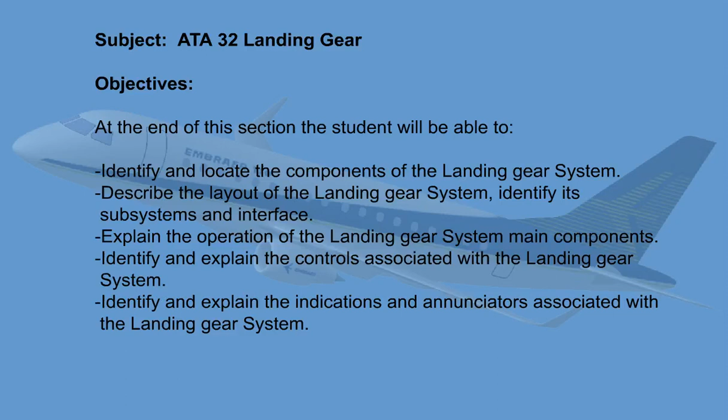The Embraer E190 has a retractable tricycle landing gear system with 2 main landing gear assemblies and 1 nose landing gear assembly. The main landing gear assemblies are telescopic and retract sideways into the wing and fuselage. Each main landing gear assembly incorporates 2 wheels with multi-disc carbon brake assemblies.

The nose landing gear assembly is telescopic and retracts forward into the fuselage. It incorporates 2 wheels with a hydraulic nose wheel steering mechanism, allowing the aircraft to turn on a taxiway as narrow as 17 meters.

During normal operation, the landing gear system is electronically controlled and hydraulically operated. Several proximity sensors are installed to provide position and status signals to different electronic modules, located in the Modular Avionics Units, or MAU, for control and monitoring purposes. The sensors also display system status to the pilots via the EICAS display in the cockpit.

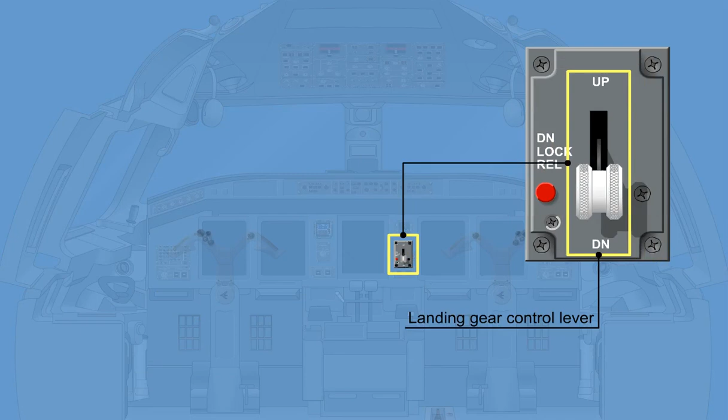The following equipment is installed in the cockpit for landing gear extension and retraction: the landing gear control lever for extension and retraction during normal operation; an extension override switch used to extend the landing gear in case of a failure in the landing gear electronics; and a manual release lever used for freefall extension in case both the electronic and electrical systems fail.

The cockpit equipment for steering the aircraft includes a steering handwheel, steering pedal sensors, and disarming switches on the control yokes.

2 brake pedals for the left and right main landing gear brakes are installed for both pilots. An emergency parking brake handle mounted on the center pedestal allows for braking even in case of a total hydraulic system loss. An optional automatic braking system can be engaged by the crew by selecting the respective auto brake switch in the cockpit.

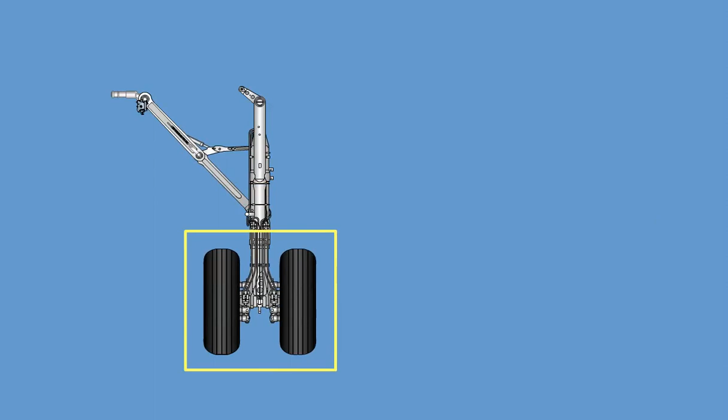The main landing gear assemblies are attached to the left and right wings. The assemblies include 2 wheels with brakes attached to a telescopic shock strut. A folding side stay holds the main landing gear in the fully extended position. A locking stay holds the side stay in the fully extended position. A pair of down lock springs hold the locking stay in the extended and locked position.

Proximity sensors transmit the following signals to the Proximity Sensor Electronic Module, PSEM: main landing gear down and locked, main landing gear up and locked, and aircraft on ground, also referred to as weight on wheels.

During retraction, a hydraulic release actuator unlocks the locking stay. A hydraulic retraction actuator retracts the main landing gear. The uplock holds the main landing gear in the retracted position. There are 2 doors attached to the outboard side of each main landing gear, and a 3rd door is attached to the wing. The doors are mechanically opened during extension and closed during retraction.

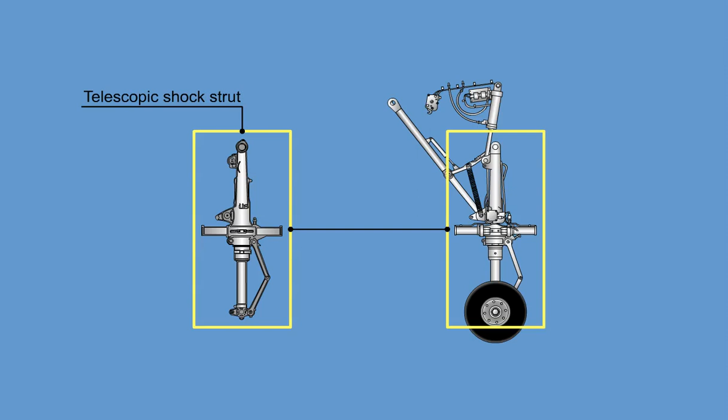The nose landing gear assembly is attached to the forward fuselage. 2 wheels and a hydraulic steering motor are attached to a telescopic shock strut. A folding drag brace holds the nose landing gear in the fully extended position. A locking stay holds the drag brace in the fully extended position. A pair of downlock springs hold the locking stay in the extended and locked position.

Proximity sensors and switches and feedback sensors transmit the following signals to the Proximity Sensor Electronic Module and the Nose Wheel Steering Control Module: nose landing gear down and locked, nose landing gear up and locked, aircraft on ground, nose landing gear steering angle and nose landing gear steering over travel.

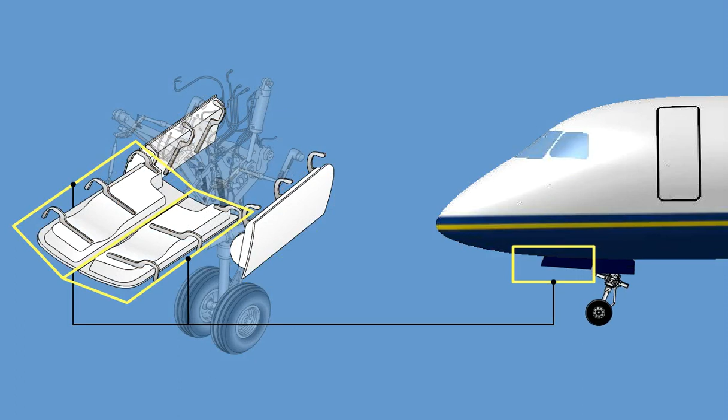During retraction, a hydraulic release actuator unlocks the locking stay. A hydraulic retraction actuator retracts the nose landing gear. The up lock holds the nose landing gear in the retracted position. Two mechanically operated doors are mounted in the fuselage on each side. The forward doors close again as the nose landing gear reaches the extended position.

There are three modes of landing gear operation available to the crew: normal extension and retraction, electrical override, and mechanical freefall. In the normal extension and retraction mode, the landing gear actuation is electronically controlled and hydraulically operated. The landing gear selector valve is controlled by the Proximity Sensor Electronic Module, PSEM, and provides hydraulic pressure to the actuation cylinders.

In the electrical override mode, the landing gear extension is electrically controlled and hydraulically operated. The extension override switch takes direct control of the selector valve, and the Proximity Sensor Electronic Module is removed from the control loop.

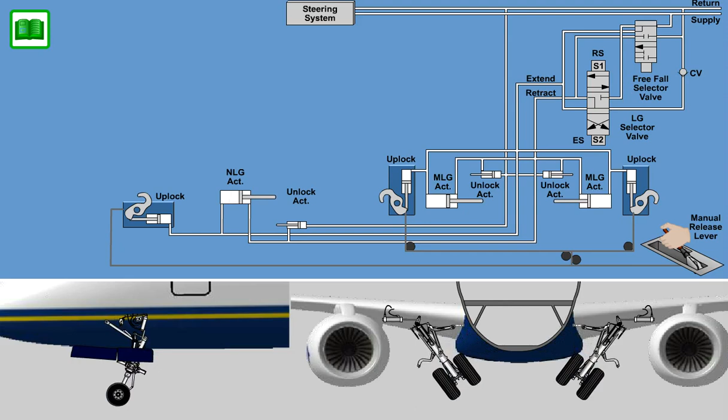In the mechanical freefall or emergency extension mode, the landing gear extension is mechanically controlled and gravity powered. Pulling the cockpit manual release lever mechanically releases all landing gear uplocks and activates the freefall selector valve. Gravity and aerodynamic forces will then extend the landing gear.

A total of 6 wheels and 6 tires are installed on the aircraft. The 4 main landing gear wheels are equipped with electronically controlled and hydraulically powered carbon composite brakes. The brake control system uses electronic modules, sensors, and hydraulic valves to control the aircraft brakes for normal braking mode, and it has an optional auto brake mode.

2 brake control modules, or BCM, and 1 optional auto brake control module, ABM, control the hydraulic pressure to the inboard and outboard brakes. With the auto brake switch in the cockpit selected on, the ABM will apply the brakes automatically after landing and following a rejected takeoff.

The anti-skid control system prevents wheel skid when the brakes are applied. The emergency parking brake system allows brake operation even with a loss of hydraulic pressure. A brake temperature monitoring system monitors actual brake temperature and provides temperature status and brake overheat warnings to the crew via the EICAS.

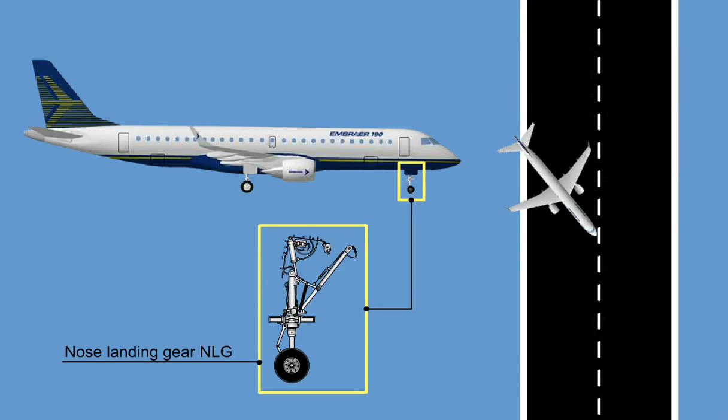The nose landing gear of the aircraft can be steered by the crew to allow for directional control of the aircraft on ground. The crew commands the steering system by using either the steering hand wheel for low-speed steering control, allowing for a steering angle of up to 76 degrees, or the rudder pedals for high-speed steering control, limiting the maximum steering angle to 7 degrees.

The system is electronically controlled and hydraulically actuated. The nose wheel steering control module, NWSCM, controls the steering hydraulic system and provides input to the hydraulic steering motor installed on the nose landing gear.

There are 2 modes of operation: normal mode, or active steering, and free caster mode, or passive steering. The normal mode allows the crew to actively steer the aircraft using either the steering hand wheel or the rudder pedals. In the free caster mode, the nose landing gear steers in response to external forces applied, such as rudder movement, differential braking, or towing.

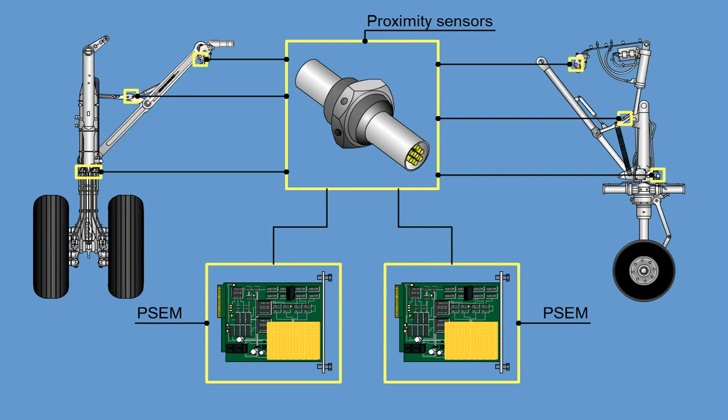The position and warning system incorporates 2 identical proximity sensor electronics modules, or PSEM. Various system proximity sensors, such as weight on wheels or landing gear up and down lock sensors, are connected to the PSEM. The PSEM controls the extension and retraction of the landing gear and indicates position of the landing gear system, the ground spoiler system, and the aircraft doors.

The nose wheel steering control module, NWSCM, controls the towing lights. The towing lights provide a visual indication of whether towing is allowed. The maximum allowable steering angle is monitored by an over-travel proximity sensor on the nose landing gear shock strut. In case the maximum towing range has been exceeded, a steering over-travel target will be sheared off. As a result, on the EICAS, the caution message, landing gear, no dispatch, will be indicated.

The PSEM also controls the air-ground system. Proximity sensors on the nose and main landing gear, referred to as weight-on-wheel sensors, sense whether the aircraft is on ground or in flight. Weight-on-wheel sensor status is distributed to various aircraft systems via the ASCB.

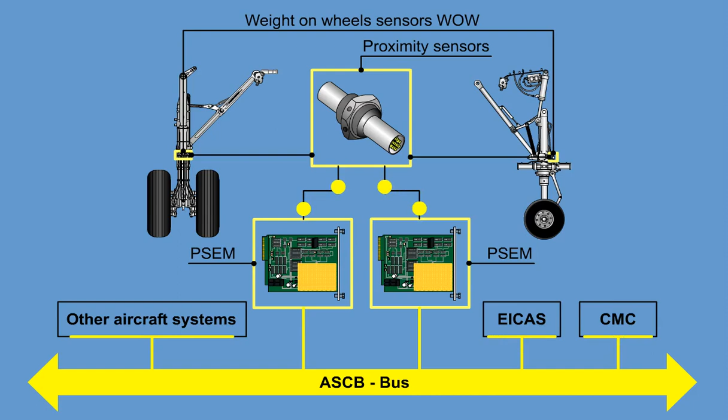The landing gear system of the aircraft uses Hydraulic System 1 and 2 to perform the various functions. Hydraulic System 3 is not used. Hydraulic System 1 provides hydraulic pressure for the following systems: main landing gear braking, outboard wheels; main landing gear braking, emergency parking outboard. Hydraulic System 2 connects to the following systems: main landing gear and nose landing gear extension and retraction; main landing gear braking, inboard wheels; main landing gear braking, emergency parking inboard; and the nose landing gear steering.

The main landing gear shock strut carries the fuselage while the aircraft is on ground. It consists of the main fitting, the sliding tube and axle assembly, and the torque links. The main fitting and the sliding tube together operate as a spring and damper, or shock absorber, reacting to the loads and aircraft movement during taxiing, takeoff, and landing.

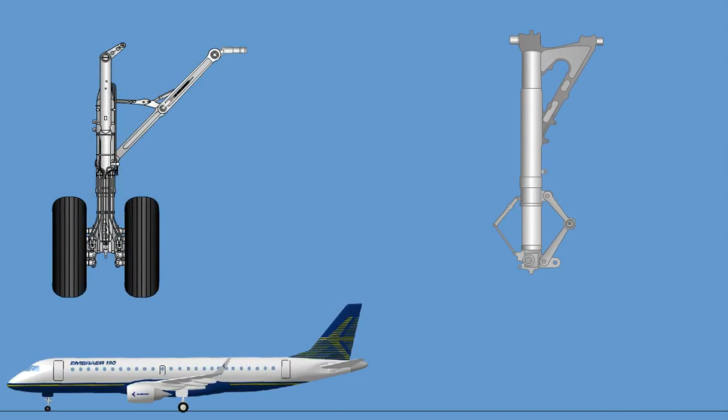The folding side stay consists of an upper and a lower part, and supports the main landing gear in the extended position. The upper part of the side stay attaches to the wing structure, and the lower part to the shock strut.

A two-piece locking stay locks the side stay in the extended position and folds it during retraction. Two proximity sensors are attached to the locking stay. They transmit a signal to the PSEM when the main landing gear is down and locked. Weight-on-wheels sensors attached to the upper part of the torque links signal aircraft on ground to the PSEM.

The shock strut includes the following main components: the main fitting, the sliding tube and axle assembly, the torque links, and the shimmy damper. The main fitting is the primary structural element of the main landing gear. It has an uplock roller and attachment lugs for the side stay, locking stay, retraction actuator, main landing gear doors, and upper torque link. It is attached to the aircraft via pintle pins.

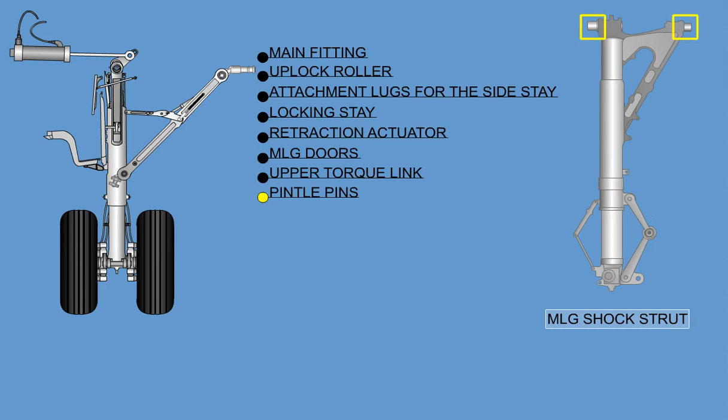The sliding tube and axle assembly has attachment lugs for the lower torque link and the jacking dome. The torque links prevent wheel rotation around the sliding tube axle. Steel targets are attached to the upper torque link for the weight-on-wheel sensor.

The main landing gear shock absorber is a double-acting oleopneumatic telescopic shock strut. The shock absorber is filled with hydraulic fluid, MIL H5606, and nitrogen.

The lower chamber is filled with nitrogen and fully isolated by a fixed piston. The upper and middle chambers are filled with hydraulic fluid. When a shock absorber absorbs the shock, the nitrogen is compressed and the sliding tube moves over the fixed piston.

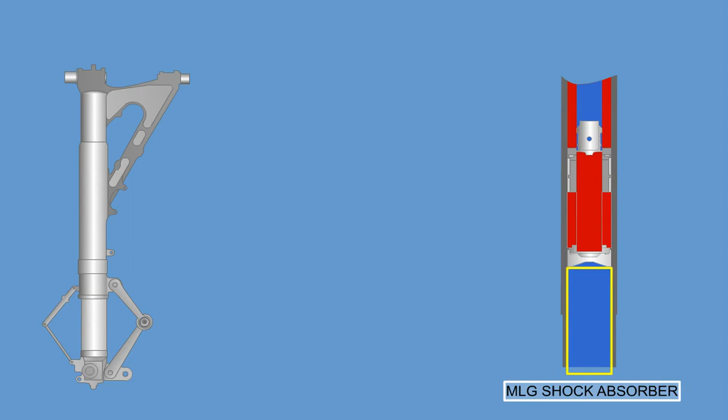Oil then flows through metered holes at the top of the sliding tube and in the fixed piston into the oil chamber inside the ram of the fixed piston to absorb the energy of the shock. After this, the compressed nitrogen expands and thus causes the shock absorber to expand again.

The main landing gear shock strut can be serviced through the hydraulic filler valve in the middle of the strut housing. The charging valve for nitrogen is in the bottom part of the sliding tube. It is not necessary to jack the aircraft for hydraulic or nitrogen service. There is also no need for any special tools.

For maintenance, the shock absorber has static and dynamic spare seals. Note, a clean sliding tube will extend the life of the dynamic seal significantly.

The side stay is a two-pieced hinged strut that holds each main landing gear in the fully extended position. The upper part is attached to the wing structure by a hinge pin, and the lower part is attached to the shock strut, also by a hinge pin. The two parts are connected with a hinge pin. The locking stay is also attached there.

The two-piece locking stay locks the side stay in the extended position. The upper part is attached to the shock strut, the lower part to the hinged connection of the side stay. For maintenance and ground handling, a ground safety pin can be installed into the locking stay. The locking stay is unlocked hydraulically by use of a downlock release actuator.

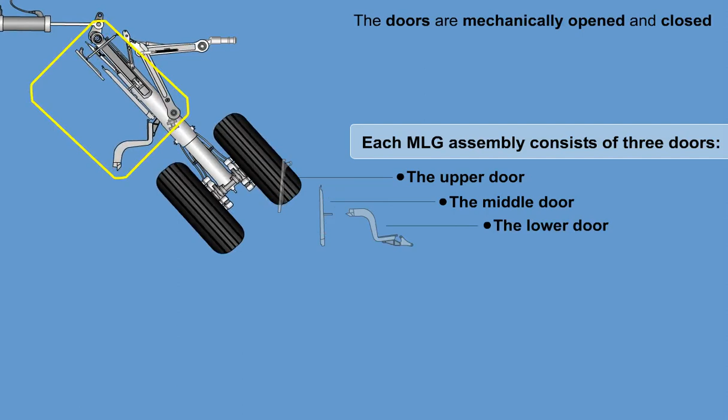Each main landing gear assembly consists of 3 doors: the upper door, the middle door, and the lower door. The doors are mechanically opened and closed during extension and retraction of the main landing gear.

The upper door is attached to rib 4 of the main landing gear box in the wings. Rods from the main landing gear main fitting attach to the upper door, pushing the door open during extension and pulling it closed during retraction.

The middle door is attached directly to the main landing gear main fitting. The lower door is attached to the middle door, and rods connected to rib 4 of the main landing gear box in the wings. During extension, the rods push the lower door open to provide clearance for the full stroke of the main landing gear shock absorber. During retraction, the rods pull the lower door closed.

The nose landing gear shock strut supports the forward fuselage while the aircraft is on ground. The nose landing gear shock strut assembly includes the main fitting, a sliding tube and axle assembly, a steering motor, and the torque links. The main fitting and the sliding tube together act as a spring and damper, and react to loads and aircraft movement during taxiing,

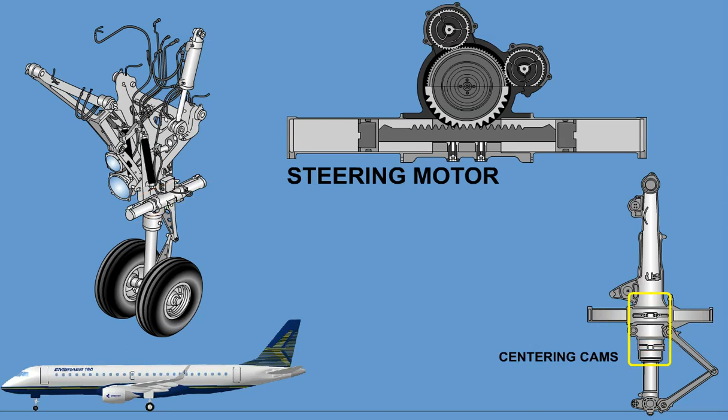takeoff, and landing. The steering motor turns the sliding tube and axle assembly for nose landing gear steering on ground. Centering cams on the sliding tube and main fitting hold the steering in the 0-degree position whenever the aircraft is not on ground.

The drag brace consists of an upper part attached to the fuselage and a lower part attached to the shock strut. A two-piece locking stay locks the drag brace in the fully extended position. A downlock safety pin can be installed when the aircraft is on ground.

The nose landing gear shock strut includes the following main components: main fitting, the sliding tube and axle, the steering motor, and the torque links.

The main fitting is the primary structural element and includes an uplock roller and attachment lugs for the drag brace, the locking stay, the retraction actuator, upper torque link, and nose landing gear doors. It is attached to the aircraft structure by pintle pins.

The sliding tube fits into the main fitting. It includes the wheel axle, a towing adapter, and attachment lugs for the lower torque link. A jacking dome is installed for nose gear jacking. The steering motor and a towing light indicator are bolted to the main fitting.

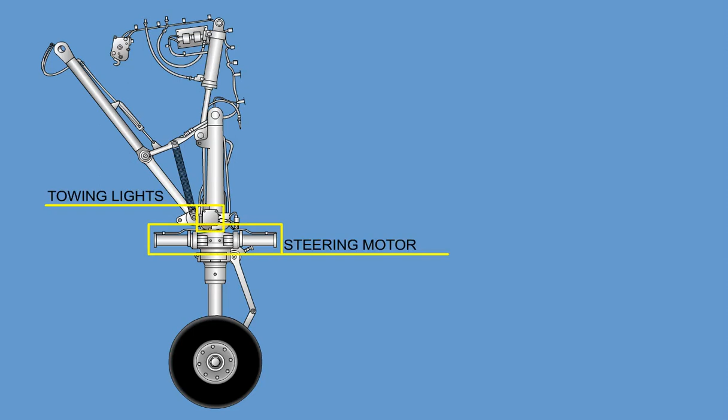The nose landing gear shock absorber is a double-acting actuator type designed to absorb kinetic energy. The shock absorber has 3 chambers. The lower one is filled with nitrogen. The 2 upper ones are filled with hydraulic fluid, MIL H5606.

The function is similar to the main landing gear shock absorber. During the initial compression, the nitrogen is compressed, and then hydraulic fluid from the upper chamber is forced through all calibrated holes into the middle chamber. To extend the shock absorber again, the backflow of oil into the upper chamber is limited through fewer holes, since the spring-loaded damping valve is forced to close. This assures a slow extension.

The nose landing gear shock absorber also has spare seals. Servicing the hydraulic fluid and nitrogen is performed through the filling and charging valves.

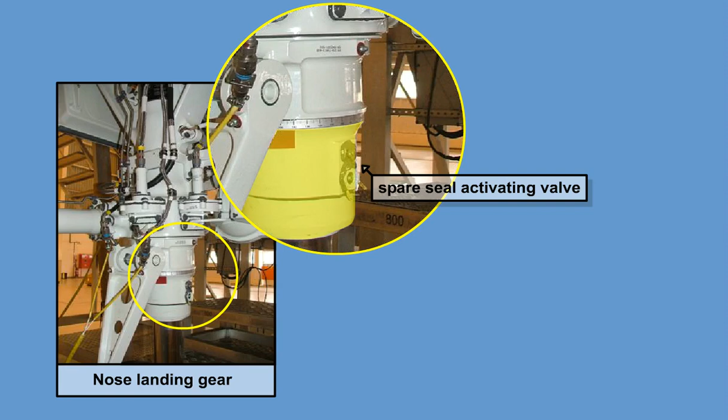The main fitting has a spare seal activating valve. This valve can isolate the main seals in case of a leakage. The activating valve is located in the lower portion of the main fitting, adjacent to the lubrication fitting. When the activating valve is closed by maintenance action, it switches the hydraulic pressure from the main seals to the spare seals. The main landing gear incorporates a similar system with a different installation.

To activate the spare seals, follow the detailed instructions as mentioned in the Aircraft Maintenance Manual Part 2, MPP.

The drag brace is a 2-piece hinged strut, which keeps the nose landing gear in its fully extended position. It is attached to the aircraft structure and to the shock strut by hinge pins, and has an attachment lug for the downlock release actuator.

The locking stay is attached at the hinge point between the 2 parts of the drag brace. The other end of the locking stay is attached to the main fitting of the shock strut. The 2-piece locking stay locks the drag brace in the extended position and folds it during retraction.

The locking stay locks mechanically in an over-centered position and can be secured in this position by a ground service pin. 2 downlock springs force the locking stay into the over-centered position, which guarantees safe locking in case of spring failure.

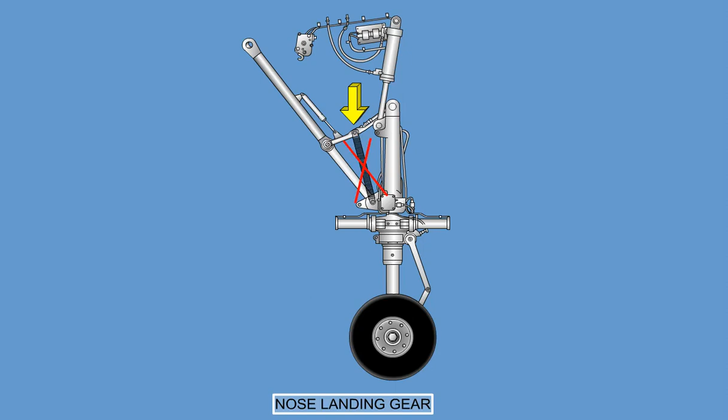2 proximity sensors are installed on the locking stay to transmit a signal to the PSEM when the nose landing gear is down and locked. Unlocking the locking stay from its down position is accomplished hydraulically using the downlock release actuator.

The steering motor is used to rotate the nose gear for maneuvering the aircraft on ground. The steering motor has 2 hydraulic cylinders attached to a geared rack. The geared rack meshes with the circular gear on the main fitting. Hydraulic power from the steering manifold can move the rack, which will then rotate the circular gear. This rotation is transferred via the torque links to the sliding tube and axle assembly.

A towing light box is also installed on the main fitting with 2 lights. If the green light is on, towing is permitted. If the red light is on, towing is not permitted because either the steering motor, the brakes, or parking brakes are pressurized. Further details will be described in the steering section.

Four doors that are attached to the forward fuselage are mechanically opened and closed as the nose landing gear extends or retracts. The rear doors are connected to the main fitting by means of a rod, pushing the door open during extension and pulling it closed during retraction. The forward door mechanism incorporates a series of rods

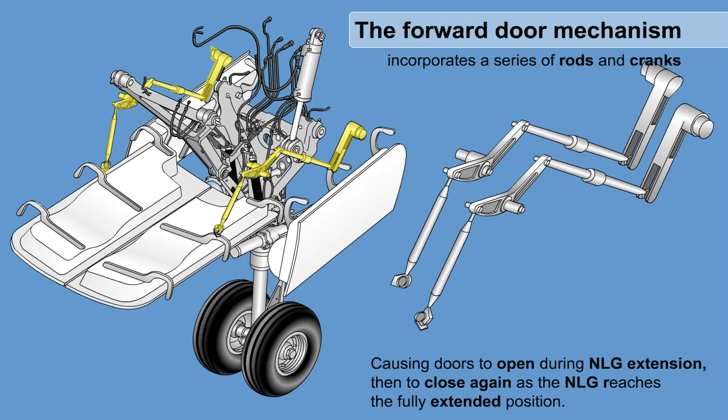and cranks, causing the doors to open during nose landing gear extension and then to close again as the nose landing gear reaches the fully extended position. During retraction, the forward doors are opened until the nose landing gear reaches the fully retracted position, and then close again.

To open a nose landing gear forward door for maintenance purposes, remove the quick release pin and release the translating nut from the telescopic rod. Then, move the door to the open position. To close a nose landing gear forward door, move the door to the closed position and torque the translating nut, then install the quick release pin on the telescopic rod.

The extension and retraction system of the landing gear is made up of a number of subsystems for system operation and control, either under normal, abnormal, or emergency conditions. These systems are the electrical control, monitoring and indication system, the landing gear hydraulic system, and the two emergency extension systems, electric override and freefall.

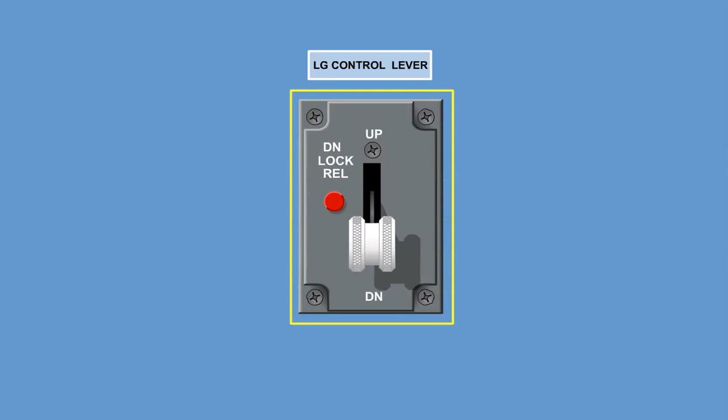Normal extension and retraction is requested with the landing gear control lever located on the co-pilot's instrument panel. The extension and retraction sequencing is then performed by the proximity sensor system, PSS, which incorporates two proximity sensor electronic modules. The PSEMs get inputs from the LDG control lever and from several proximity sensors of the LDG.

The LDG hydraulic system receives power from the hydraulic system number 2. It contains the necessary valves and actuators to perform the operations required from the electrical control circuit. The main components are the LDG selector valve, the uplock boxes, the downlock release actuators, the LDG actuators, and the freefall selector valve.

If the normal extension fails, the landing gear can still be extended by using an electrical override switch. The PSS control system is then bypassed and the LDG extension solenoid is directly controlled.

If the electrical system is not available, a pure mechanical system, the freefall system, can be used to extend the landing gear. In this situation, the freefall selector valve and the uplock actuators will be moved mechanically. All hydraulic lines will be connected to return and the landing gears will extend by freefall.

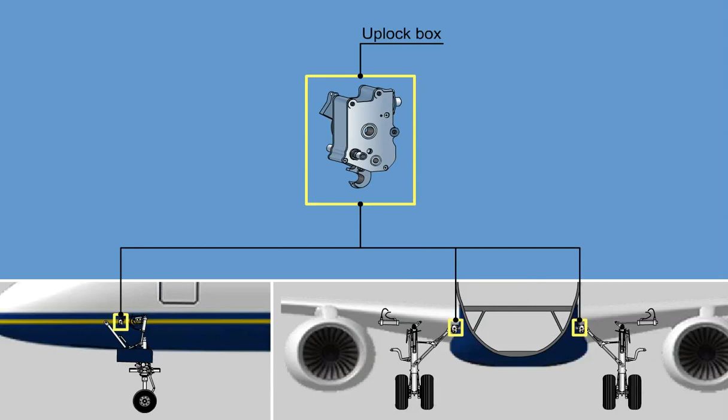3 separate uplock boxes are fitted to the aircraft structure for uplocking of the main and nose landing gear. When the respective landing gear is fully retracted, the uplock roller on the shock strut is engaged by the hook of the uplock box. The uplock box is a hydromechanical unit. The locking action is performed mechanically.

The unlocking system can be actuated either electrically and performed hydraulically for normal and electrical override extension, or actuated mechanically for emergency freefall extension.

2 proximity sensors are installed on each uplock box. These sensors send the uplock signal to the PSEMs when the landing gear is up and locked.

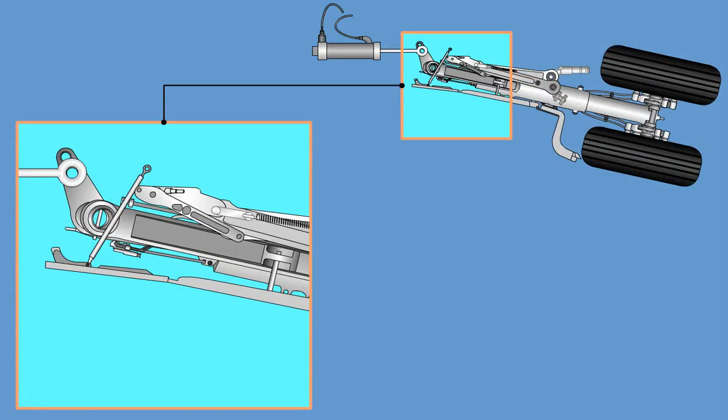The main landing gear downlock release actuator is a double-action cylinder with an adjustable piston rod. The cylinder housing is attached to the main fitting of the landing gear, and the piston rod is attached to the locking stay. During extension, the actuator is forced to extend by the movement of the landing gear, since both lines of the downlock release actuator are connected to drain.

To retract the landing gear, the downlock release actuator has to overcome the spring force of the downlocking springs and remove the locking stay from its over-centered position. Therefore, hydraulic pressure is directed from the landing gear selector valve through the retraction line to the piston. The cylinder will retract and unlock the landing gear.

The nose landing gear downlock release actuator is installed between the locking stay and the drag brace. The function is the same as the main landing gear downlock release actuator.

The landing gear control lever is installed at the cockpit central panel and is used to command the landing gear extension and retraction. The position of the lever is sensed by microswitches, which are connected into the PSEMs.

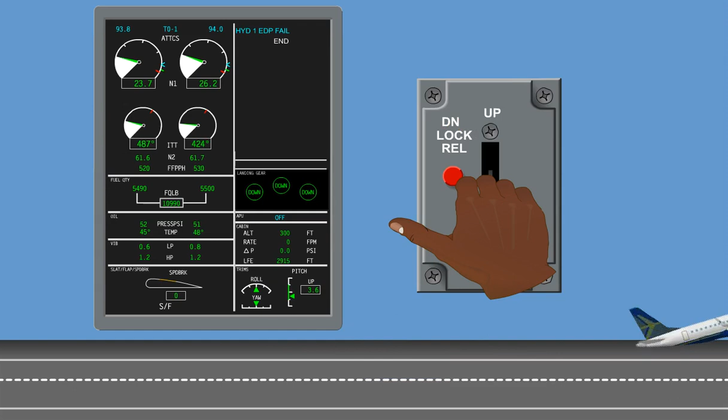A mechanical locking device prevents inadvertent movement to the up position while the aircraft is on ground. A solenoid-operated electromechanical device releases the locking mechanism, allowing the lever to be moved to the up position with weight off wheels. In case of a control system or solenoid failure, a red override push button in front of the control lever panel allows mechanical release of the locking mechanism when pressed.

Steering, we have nose wheel steering control module.

The landing gear selector valve is installed. A check valve is incorporated into the return line of the landing gear selector valve. It is a spring-loaded poppet valve that opens if pressure rises above 5 psi. It will avoid backflow in case of a pressure peak from the system return line, which assures that no inadvertent command will be sent to an uplock box and release the landing gear.

The landing gear selector valve is installed in the fuselage. It sends hydraulic pressure to the extension or retraction side of the landing gear hydraulic circuit in order to move the landing gear up or down.

The valve is an electrically controlled 3-position 4-way valve. If both solenoids S1 and S2 are de-energized, the spool valve will be held in the center position by the 2 springs. Pressure is blocked off, and all landing gear lines are connected to return.

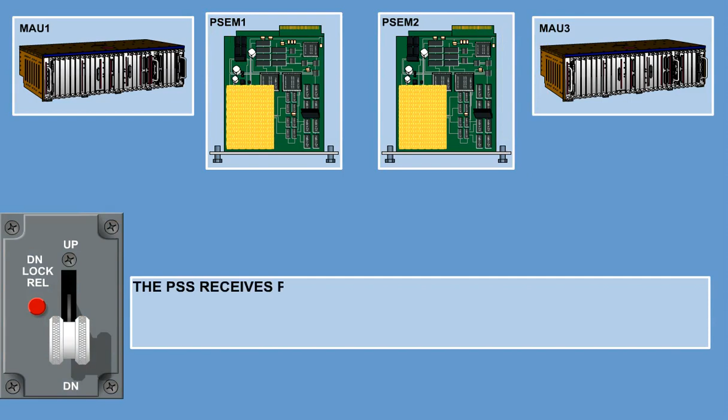The PSS receives position information from the microswitches in the landing gear control lever and prohibits movement of the control lever with weight on wheels via the landing gear control lever unlock solenoid.

The landing gear selector solenoid valves are controlled by the PSEMs. Information from each gear is directed from the uplock, downlock, and weight on wheel proximity sensors to the PSEMs. Finally, the PSEMs send the status information of the gears to the MAUs for indication. For system redundancy, each PSEM can control landing gear extension and retraction fully independent of the other.

To retract, the landing gear control lever has to be selected to up. Hydraulic pressure can pass unrestricted through the freefall selector valve to the landing gear selector valve. The PSS energizes solenoid S1 and the valve will move to direct hydraulic pressure to the LDG uplines.

The retraction side of all retraction actuators and downlock release actuators will be pressurized. Due to the smaller volume of the downlock release actuators compared to the retraction actuators, they will move first, unlocking the 3 gears. Then the retraction actuators move the gears up until they lock in the uplock boxes.

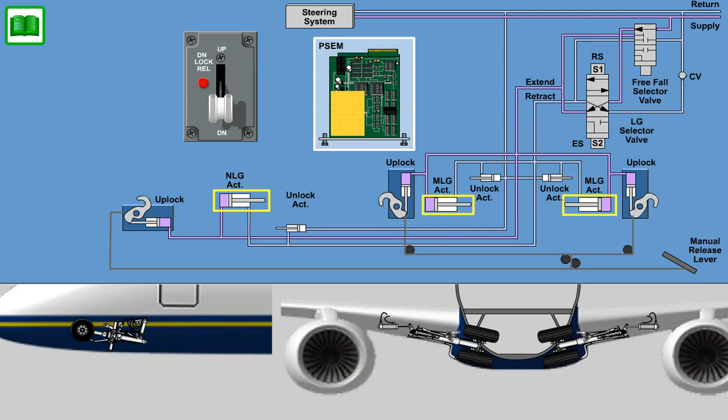The extension side of all retraction actuators and uplock boxes will be pressurized. Due to the smaller volume of the uplock box actuators compared to the retraction actuators, they move first, unlocking the 3 gears. Then, the retraction actuators move the gears down until they lock in the over-centered positions.

When the down and locked position is sensed by the downlock proximity sensors, the PSS will de-energize the solenoid S2. The landing gear selector valve will move to the neutral position and all lines connect to return.

In case of control system or hydraulic system failure, a mechanically operated freefall system can be used to lower the landing gear. This system includes the following main components: the freefall selector valve, the manual release lever and forward quadrant, the main landing gear quadrant, nose and main gear uplock boxes, and the connection cables. Gravity and aerodynamic forces are used to extend the landing gear.

The freefall selector valve is installed in the lower stub main box. It is a 5-way, 2-position hydraulic selector valve that can be manually activated via the control lever.

In the normal or non-actuated position, pressure can pass through the freefall selector valve and all other lines are blocked off. When actuated, the valve connects all landing gear hydraulic lines to return and closes off the pressure line, allowing unrestricted extension of the landing gear.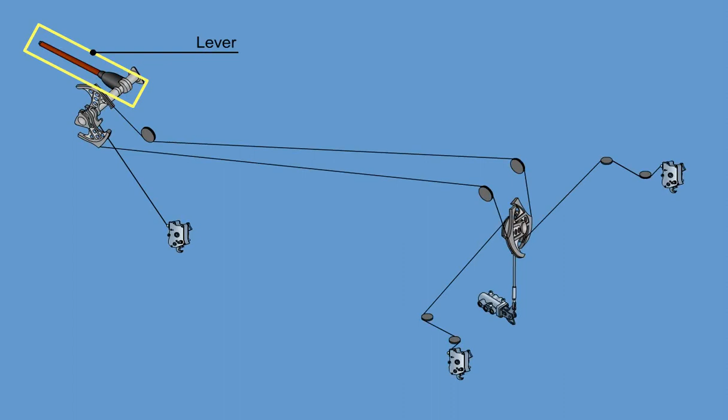The lever is connected via a rod to the forward quadrant, which is then connected via a closed loop cable to the main landing gear quadrant. Another cable is directed from the forward quadrant to the nose landing gear uplock box. From the main landing gear quadrant, a cable is directed to each main landing gear uplock box and a rod to the freefall selector valve.

To extend the landing gear with the manual system, the LDG selector must be selected to down. Pull the manual lever up to an angle of 62 degrees. This will rotate the forward quadrant and via the closed loop cable, the main landing gear quadrant as well.

The freefall selector valve is moved by the rod from the main landing gear quadrant and connects all hydraulic lines to return. The uplock hooks in all uplock boxes are mechanically forced to open by the cables. The landing gears are released from their uplock and extend by gravity and aerodynamic forces.

The downlock springs force the locking stays down to lock the gears in the over-centered position. Even in freefall gear extension, one downlock spring is sufficient to lock the gear.

An alternative way to extend the landing gear in case of electrical command failure is the electrical override system. An electrical override switch is located beside the manual release lever on the right-hand side of the center pedestal. When this switch is selected, 28-volt DC from the essential bus 3 is sent directly to the extension solenoid of the landing gear selector valve, bypassing the proximity sensor system.

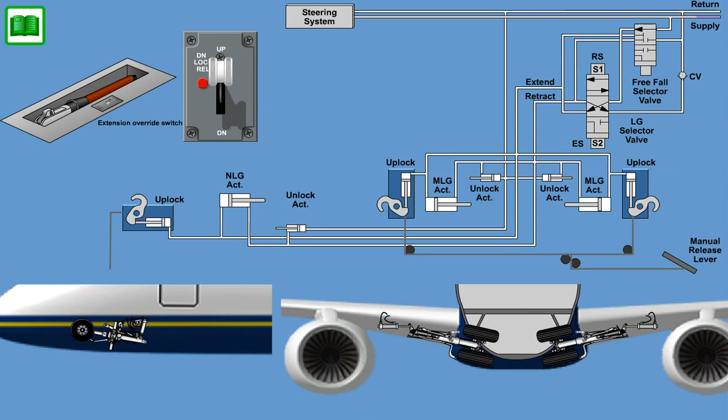Hydraulic pressure is directed through the landing gear selector valve, unlocking the uplocks in the uplock boxes and extending the gear via the retraction actuators in the same way as in normal extension.

The brake system installed in the Embraer E190 incorporates a main brake system and an emergency and parking brake system. 2 brake assemblies are installed on each main landing gear. The main brake system is a brake-by-wire system, controlled by 2 brake control modules called PSEMs.

The outboard brakes are hydraulically powered by hydraulic circuit number 1, the inner brakes by hydraulic circuit number 2. The system provides differential braking capability to steer the aircraft in case of steering system failure. Therefore, the left brake pedals activate the left main landing gear brakes, and the right brake pedals activate the right main landing gear brakes.

The brake control system has the following functions: pedal command braking, anti-skid protection, pressure control, touchdown protection, locked wheel crossover protection, gear retract braking, built-in test and communication with the MAU. An optional auto brake system can be installed.

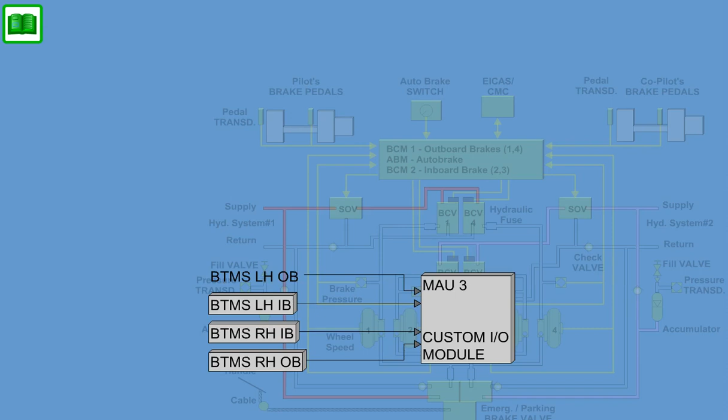The brake temperature is monitored by the Brake Temperature Monitoring System, called BTMS. Brake temperature and system status and failures are indicated on the MFDs and EICAS. In addition, the brake control modules supply failure information to the CMC that can also be used for brake system tests.

The brake control system has the following main components: 2 cockpit brake pedal assemblies, which include 1 brake pedal transducer, LVDT, for each pedal. 2 identical brake control modules, PSEM-1 controlling the outboard brakes and PSEM-2 controlling the inboard brakes, and 1 optional auto brake module, all located in the MAUs.

There are 2 brake shutoff valves, supplying or isolating hydraulic pressure to the brakes, depending on the operational situation, and 4 brake control valves, 2 for the inboard, 2 for the outboard brakes, to regulate the hydraulic pressure. 4 pressure transducers provide hydraulic pressure signals to the brake control module.

1 hubcap-driven, axle-mounted wheel speed transducer per wheel transmits wheel speed signals to the brake control module. 1 optional auto brake switch located in the cockpit selects the various auto brake modes.

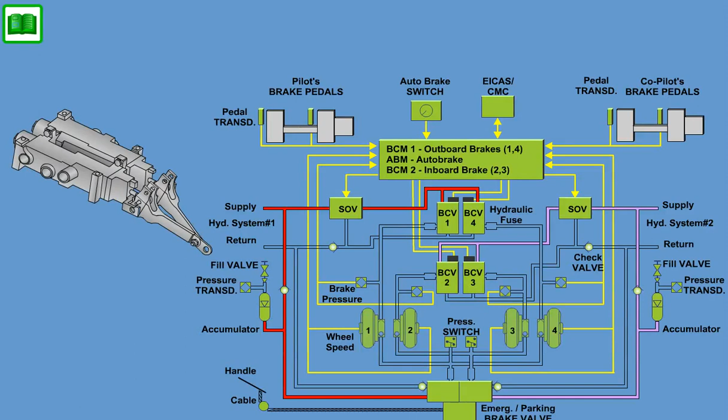The emergency and parking brake control system makes use of the following main components: an emergency park brake handle in the cockpit to control or set the system, one dual emergency parking brake valve, two hydraulic fuses, one in each outlet of the emergency parking brake valve, two parking pressure switches, one for the outboard and one for the inboard parking brake for cockpit indication.

Via the shuttle valves, main brake or emergency parking brake activation is selected at each brake. Two accumulators can supply pressurized fluid to the emergency parking brake valve.

The main brake activation is proportional to the displacement of the pilot's or co-pilot's brake pedals in the cockpit. The position of the pedals is sensed by four linear variable differential transformers, LVDTs, one dedicated to each pedal. For redundancy, each LVDT is a dual sensor with a primary and secondary winding to sense the position of the movable core. The windings are excited by the brake control modules, which can calculate pedal position via the feedback signal. To prevent inadvertent brake application, an internal spring is installed in the LVDT, forcing its core to the neutral position.

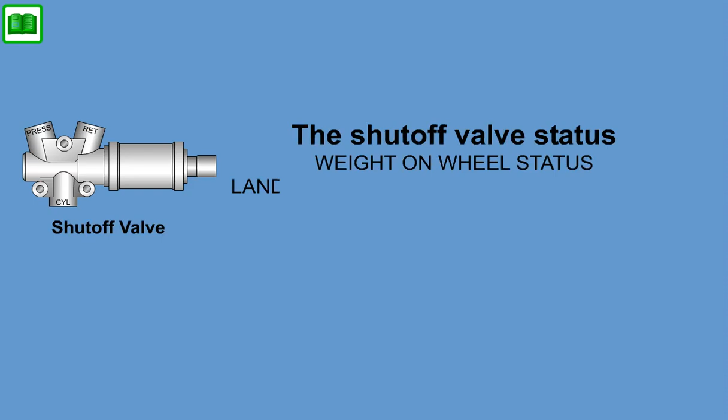Two brake control module controlled main brake shutoff valves are installed at the forward wing stub. Each brake control module will control its onside three-way two-position solenoid-operated brake shutoff valve. When de-energized, the pressure port is closed. The main purpose is to isolate faulty hydraulic components. The secondary purpose is to select shutdown air mode. The shutoff valve will be de-energized closed by the PSEM when air mode is established, or energized open when ground mode is established. The shutoff valve status depends upon the following inputs: weight on wheel status, landing gear selector lever position, wheel speed and velocity reference, throttle lever position, and brake pedal position.

A pressure transducer is installed in each of the four hydraulic pressure lines downstream of the hydraulic fuses. The transducer is a hermetically sealed silicon pressure capsule-mounted type transducer. The silicon capsule converts the pressure in an electrical signal that is transmitted to the respective brake control module. The transducers are positioned in the rear wing-to-fuselage fairing, close to the wheel well. The brake control modules use the signals for the closed-loop pressure control to control the brake control valve in relation to actual delivered pressure sensed by the transducers.

Two brake control valves are installed at the wing stub. One valve controls and modulates pressure to the inboard brake system, and the other to the outboard brake system. The brake control valve is a dual two-stage pressure-controlled servo valve. The first stage develops hydraulic control pressure proportional to input current from the brake control module, and the second stage then supplies the related first stage controlled pressure to the brakes.

If the brake pedals are fully depressed, the armature in the first stage will close off the return port and system pressure can move the second stage spool valve to deliver full system pressure to the brakes. With no input current, the armature will close off the pressure port, and the spring in the spool valve will move the spool valve to cut off any pressure to the brakes. Brake pressure can be modulated at any intermediate position of the servo valve and in relation to the spool valve to allow different brake forces.

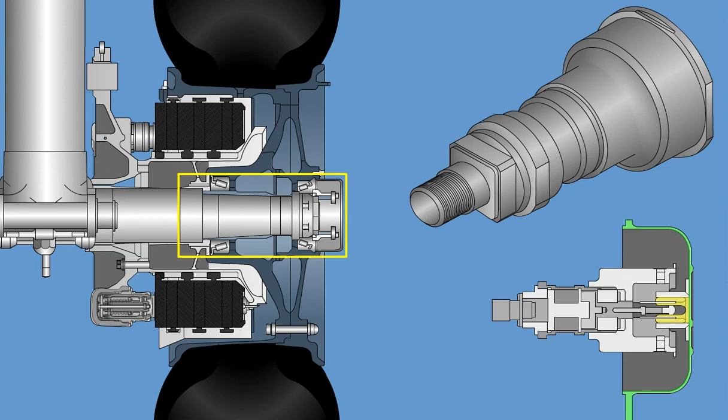A wheel speed transducer is installed in each main landing gear wheel axle. The transducer has a stator and a rotor and self-contained bearings. As the wheel is turning, the rotor is forced into rotation by a clip inside the hubcap of the wheel. The output frequency varies directly with the wheel speed and is sensed by the related brake control module, which processes the signal for use in the anti-skid, locked wheel protection, and spin-up override system.

The volumetric hydraulic fuses are installed at the wing stub area. One is installed in each brake line downstream of the brake control valve. They prevent the loss of hydraulic fluid in case of a leakage in the hydraulic brake lines or at the brakes, and limit the quantity of hydraulic fluid that could hit the hot brakes. The fuses measure the flow and velocity passing through them. In case of a hydraulic leak behind the fuse, the pressure drop will cause the flow and velocity to increase. This will cause the fuse to close. The manual bypass lever on the fuse can be used to reset the fuse after it is activated, and to bypass the fuse to allow brake system bleeding without inadvertent fuse activation.

4 check valves are installed in the hydraulic return lines. 2 are installed in the return line of the main brake system, and 2 in the return line of the emergency parking brake system. All of them should prevent any back pressure to the brakes by allowing flow only in the direction of return. Also, 2 check valves are installed in the supply lines to the emergency park brake accumulators to prevent discharging of the accumulators when no supply pressure is available, assuring sufficient pressure for emergency parking brake activation.

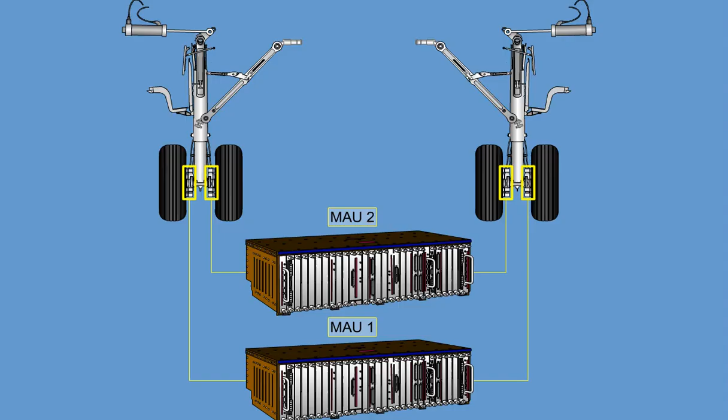Two identical and interchangeable but independent brake control modules, PSEMs, are installed in the MAUs. PSEM1 controls the outboard brakes and is located in MAU1. PSEM2 controls the inboard brakes and is installed in MAU2. The two PSEMs do not communicate with each other.

Each PSEM contains all the circuits necessary to perform the control, monitoring, built-in test, component interface, fault isolation, and indication for two wheels. It also incorporates the circuits required for communication with the aircraft indication system, and for maintenance and troubleshooting purposes. The built-in test will check the internal circuits of the brake control module, and almost all associated components in the brake system which receive or send signals to the PSEM.

For system redundancy, PSEM1 is powered by DC Essential Bus 1 and PSEM2 by DC Essential Bus 2.

Inputs of the following components and sensors are processed in the brake control module: the cockpit pedal sensors, the pressure transducers, the wheel speed sensors, hydraulic systems pressure status, thrust lever input, landing gear lever position, air ground status, main gears down locked status, and initiated test request from the CMC. In turn, the PSEM generates signals to the shutoff valve, the brake control valve, the ground spoiler system, the thrust reverse system, the nose wheel steering, and the CMC and EICAS.

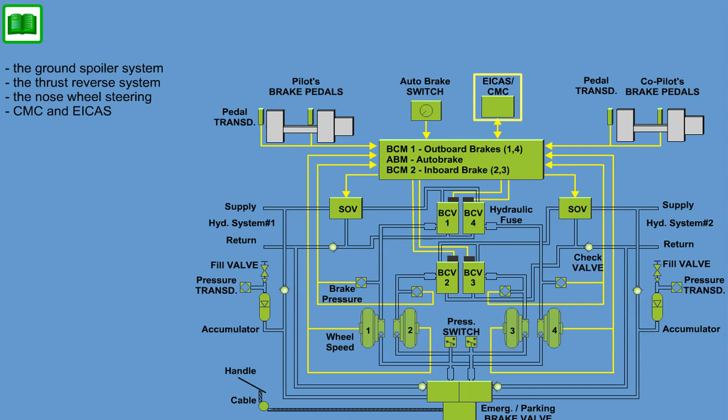Pressure to the brakes is controlled through the pilot's and co-pilot's brake pedals. When the brake pedals are depressed, the pedal LVDT position is sensed by the brake control modules, which modulate the brake pressure via the brake control valves.

The PSEMs perform closed-loop pressure control on the four wheels with use of the main brake system pressure transducers. The system controls brake pressure to each pair of inboard or outboard brakes to ensure equal load, energy, and wear sharing during taxi near the brake application threshold. By depressing only the left-hand or right-hand brake pedal, the PSEM will supply brake pressure only to the selected side brakes to allow steering by differential braking.

An anti-skid system provides maximum brake efficiency with minimized tire wear and optimized braking distance. The PSEM provides anti-skid protection when the wheel speed is above 10 knots. The wheel speed for the anti-skid system of all four wheels is measured by the axle-mounted wheel speed transducer and processed by the brake control modules. This wheel speed information is used to determine incipient wheel skid conditions.

A correction signal, the anti-skid command, is generated by the PSEM according to the wheel skid condition to release brake pressure on the individual wheel through the brake control valve.

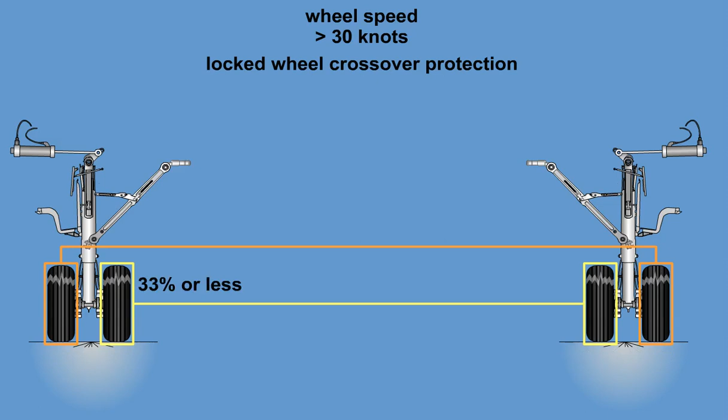Whenever the wheel speed is above 30 knots, the locked wheel crossover protection will be armed. For this protection, the inboard wheels are paired together and the outboard wheels are paired together. Locked wheel crossover compares the wheel speed of a wheel with its paired wheel. If the wheel speed of the wheel is 33% or less of its partner wheel, then a locked wheel condition is declared by the brake control module.

And brake pressure to the locked wheel is fully removed by selecting Return. Locked wheel crossover protection will be disabled when the faster wheel speed is less than 30 knots.

When the gear retracts, the main wheels have to be stopped by the main brake system. The brake control system supplies 300 psi through the brake control valve for 4 seconds to all 4 brakes, whenever the weight on wheel inputs indicate air, the gear handle input transitions to up position, and the gear down and locked input is not active. The nose wheels are stopped when they hit a stop inside the nose landing gear bay.

Spin-up override allows braking when wheel speed above 50 knots is detected. Spin-up override will also establish ground mode and will override touchdown protection. At 10 knots, the spin-up override will reset automatically. Both touchdown protection and spin-up override work on an individual wheel basis.

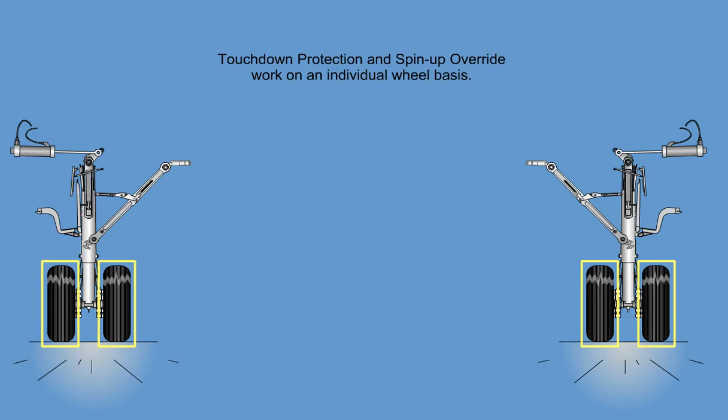The two shutoff valves are used to isolate the brakes. On ground, with weight on wheel and thrust lever below 80%, the SOVs are energized open by the PSEMs to allow brake control over the full travel of the pedals.

With thrust lever above 80% and pedal position above 20%, the shutoff valves open, while if the brake pedal position is below 10%, the shutoff valves will be de-energized to close. After liftoff, the shutoff valves will be energized open for gear retract braking and will be closed after a 10-second time delay when the wheel speed and reference speed are 0, the gear handle is not down, and weight off wheel is detected.

As long as the aircraft is in flight, the brakes remain isolated by the de-energized shutoff valve. Prior to landing, when the landing gear selector is set to down, the 2 shutoff valves are tested automatically by a pressure pulse test.

The brake control modules energize the shutoff valves and apply a pressure of 600 psi. This change must be verified by the transducers. Then, the brake control modules shut off the pressure command and again de-energize the shutoff valves.

The shutoff valve will be energized to on when weight on wheel is detected and the thrust lever is below 80%. The touchdown protection logic prevents brake application prior to touchdown protection, weight on wheels plus 5 seconds, or wheels spin up.

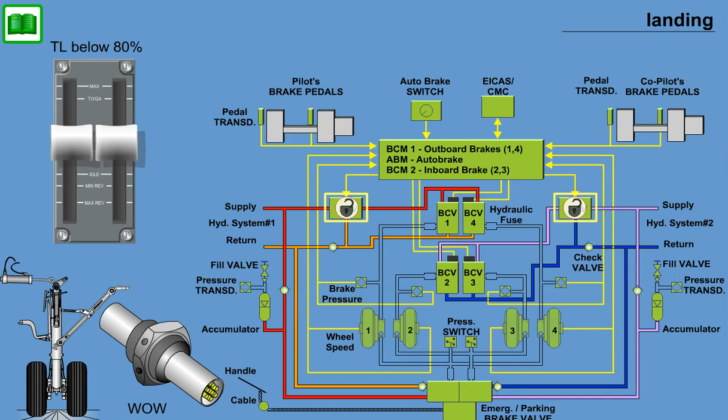The brake control system includes 3 different types of built-in tests. Power-up or event-initiated tests, which are performed every time power is supplied to the system as part of the system initialization, or when the power has been interrupted for more than 50 milliseconds or after a predetermined event.

Periodic tests, which are performed repeatedly, concurrently with normal brake control functions. Operator-initiated tests, which are performed in response to specific requests.

All initiated tests are executed only if all wheel speeds and velocity references are 0, weight on wheel is indicated and low pressure is available. The tests are performed by the brake control module initiated by CMC.

If a failure in the brake control system occurs, it will be indicated on the EICAS, with additional failure information available on the CMC. The brake left-hand fail caution will indicate that the left inboard and outboard brake failed. As the right inboard and outboard brakes are available, unequal brake force will be applied.

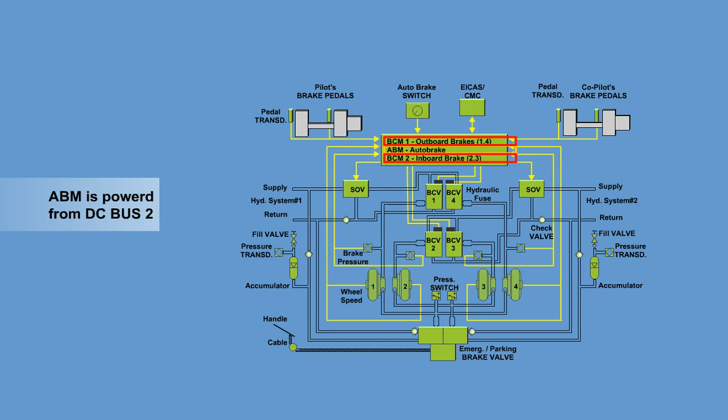To prevent unwanted auto brake activation, the ABM considers the following signals: throttle lever position, weight on wheels, landing gear down and locked, main landing gear wheel speed, and brake pedal position.

The 5-position selector switch on the main instrument panel in the cockpit is used to select the auto brake modes. The following switch positions are available: rejected takeoff for maximum deceleration, off, low for low deceleration, medium, and high for high deceleration during auto brake.

If the brake control system detects a brake fault, the auto brake selector switch springs back to the off position. According to the switch position, the ABM, which is an additional card in MAU2, gives pressure commands to both brake control modules to control the inboard and outboard brakes as during normal brake application. During auto brake control, the following protections are still available: anti-skid control, touchdown protection, and locked wheel protection.

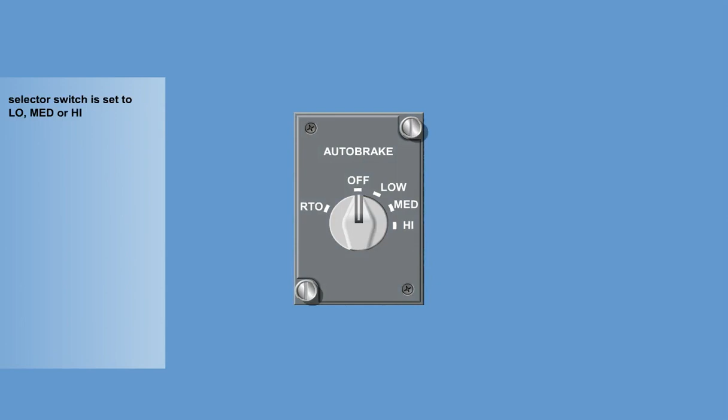To prevent inadvertent auto brake application, several requirements have to be fulfilled to arm and activate the auto brake system. Landing auto brake can only be armed if the selector switch is set to low, medium, or high, the left and right weight on wheels indicate that the aircraft is in flight, the average wheel speed is below 60 knots, pedal positions are all below 10%, and there are no brake control system faults.

The landing auto brake will be applied if the landing auto brake is armed, the average wheel speed is above 60 knots, the weight on wheels indicates aircraft on ground for more than 2 seconds, and both throttle levers are in the idle position. The ABM calculates the landing auto brake application in relation to deceleration.

The crew can reselect any of the 3 levels without disarming the auto brake. Landing auto brake will be disarmed if the selector switch is set to off or RTO, or any pedal position is above 10%, or any brake control system failure is detected, or either throttle lever is advanced beyond idle.

The rejected takeoff auto brake will help the crew to stop the aircraft if it has been armed and takeoff is rejected.

The rejected takeoff auto brake can only be armed if all of the following requirements are fulfilled: the selector is set to RTO, left and right weight on wheels indicate that the aircraft is on ground, the average wheel speed is below 60 knots, and no brake control system failures are detected.

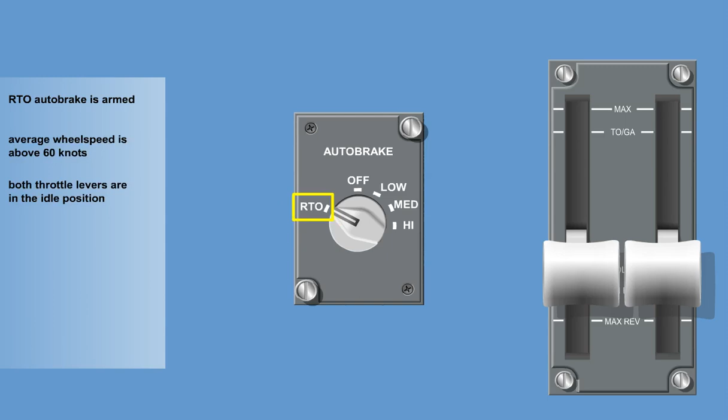The RTO auto brake will be applied if RTO auto brake is armed, the average wheel speed is above 60 knots, and both throttle levers are in the idle position.

The rejected takeoff auto brake will be disarmed if the selector switch is set to off, low, medium, or high, or any pedal position is above 20% while wheel speed is above 60 knots, or any brake control system failure is detected while wheel speed is below 60 knots, or either throttle lever is advanced beyond idle during rejected takeoff auto brake application.

If a failure in the auto brake system is detected, the auto brake fail caution will illuminate on the EICAS to indicate that normal braking has to be applied.

Whenever one of the auto brake modes is armed, it will also be indicated on the EICAS by the following status messages: auto brake low armed, auto brake medium armed, auto brake high armed, auto brake RTO armed. If auto brake data is invalid or unavailable, 3 amber dashes will replace the indication.

The fully independent emergency and parking brake system stops the aircraft in case of main brake system failure and applies the parking brake. The system is controlled from the actuating handle in the cockpit, which is mechanically connected by a push-pull cable to the emergency parking brake valve.

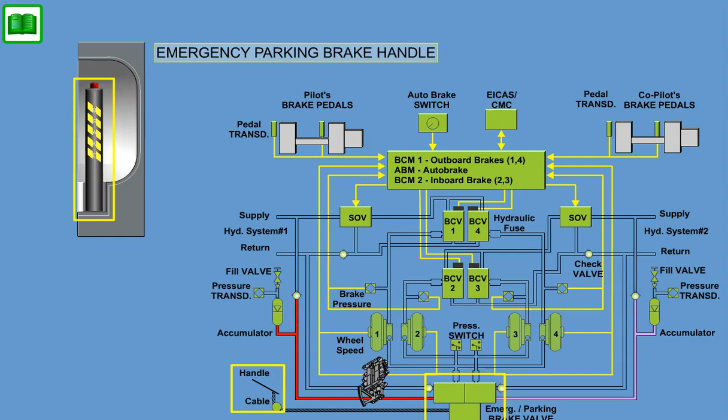The connection between the handle and the emergency parking brake valve is accomplished with a ball bearing control cable. The push-pull cable consists of a moving core member held between 2 rows of ball bearings by 2 outer races, all contained in a flexible casing.

The hydraulic fluid has to pass through hydraulic velocity fuses downstream of the emergency parking brake valve, equal to the ones described in the main brake system. The 2 emergency parking system fuses are installed in the wing stub.

A shuttle valve installed on each brake will allow flow from the higher pressure source to the brake, either main brake pressure or emergency parking brake pressure.

Pressure in the emergency parking brake lines is monitored by 2 pressure switches, one for the inboard brakes and one for the outboard brakes.

If the pressure rises above 140 psi in either line, the parking pressure switch will close, and on the main instrument panel, the emergency park brake on light will come on.

The pressure switches are installed in the rear wing to fuselage fairing, close to the wheel well.

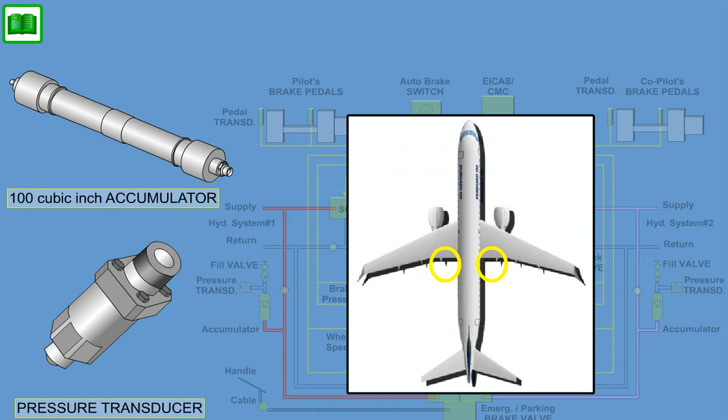The accumulator is a cylindrical piston type with separated oil and nitrogen chambers. The pressure transducer will monitor the nitrogen side of the accumulator and will provide a low-pressure signal if the pressure drops below 1,200 psi. If both brake accumulator pressures are low and low pressure of hydraulic systems 1 and 2 is detected,

an emergency brake fail caution will be illuminated. The actual accumulator pressure can be monitored on the MFD System Status Synoptic page.

To activate the emergency parking brake, the handle in the cockpit has to be pulled up. Hydraulic pressure from System 1 and/or 2 is regulated in the emergency parking brake valve and directed through the hydraulic fuses and the shuttle valves to activate the brakes.

If the handle is pulled up fully, it will lock at 60 degrees position, and the pressure is kept on the brakes. If the brake pressure is above 140 psi, the emergency park brake on light in the cockpit will illuminate.

If the EICAS is in takeoff configuration, then a red Park Emergency Brake Set warning will be indicated. The emergency brake fail caution indicates that both hydraulic system 1 and 2 accumulator pressures are low. If one brake accumulator pressure is low, or inboard and outboard parking brake pressure disagree, the emergency parking brake fault will be displayed.

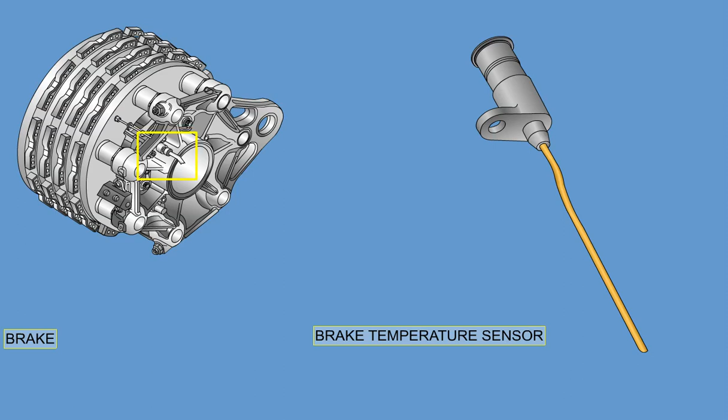One location is used to mount the sensor for the left-hand brake, and the second location is used to mount the sensor for the right-hand brake. The sensors are always in the upper position, allowing sensor replacement with the brake installed.

The electrical signals from the four sensors are processed through I/O Module 2 in MAU3, which converts the BTMS voltage to a signal for display in the cockpit. The BTMS output that is processed in the I/O Module 2 of MAU3 is indicated on the System Status Synoptic page of the MFD. The MFD Synoptic page has two ways of providing temperature indication, numerical and pictorial.

There are two brake temperature categories on the MFD, Status and Advisory. Temperature indication is green up to 251 degrees Celsius, which means that the brakes are able to absorb maximum kinetic energy. Advisory indication is shown in amber between 252 and 840 degrees Celsius, which indicates that cooling is required.

If the temperature information has failed or is out of range, the arrow will disappear and the readout will be replaced by amber dashes. On the EICAS, the brake overheat caution will show up for brake temperatures above 690 degrees Celsius, and will disappear again if temperatures drop below 690 degrees Celsius.

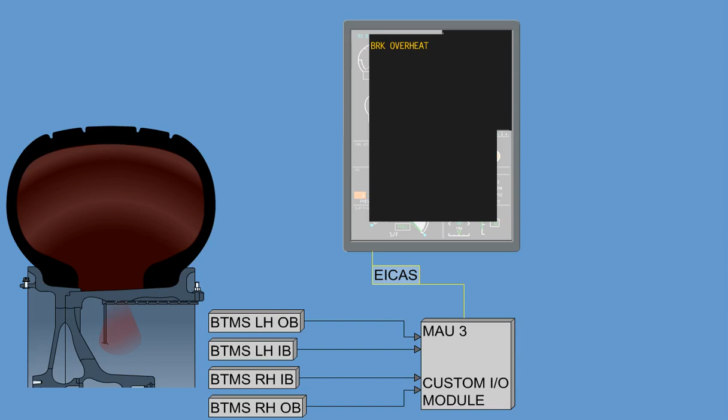Each landing gear of the Embraer E190 is equipped with a pair of wheels and a pair of tires. Each of the wheels is made of two wheel halves. A filling valve and a pressure relief plug is installed in every wheel. The main wheels are fitted with fuse plugs to prevent tire blowouts due to excessive brake temperature. The tubeless multi-retreadable tires are rated to 225 miles per hour.

On each main landing gear, 2 multi-disc carbon brake assemblies are installed. The hydraulically actuated self-adjusting brake assemblies are equipped with quick disconnects for the hydraulic lines and 2 brake wear pins for visual inspection.

The main wheel is a split web assembly made of 2 wheel halves, machined from forged aluminum. The 2 wheel halves are connected by 16 bolts with self-locking nuts and washers. 2 tapered roller bearings are installed in the center of the wheel, fully enclosed by bearing seals.

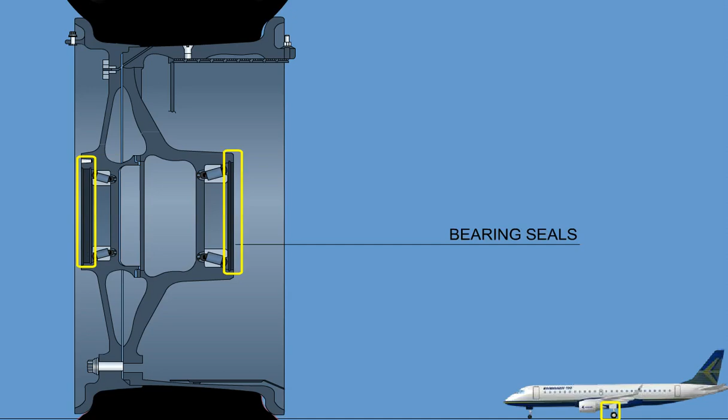A filling valve, or optionally a filling valve with an incorporated pressure gauge, is installed in the outer wheel half. A pressure relief plug, also located on the outboard wheel half, prevents overinflation of the tire. If the pressure rises to 365 to 435 psi, a metal diaphragm will break and release tire pressure. After activation, the plug has to be replaced.

8 quadruple-layer stainless steel heat shield segments are fitted to the inboard wheel half to protect the wheel and tire from excessive heat generated by the brake. In case of brake overheat, 4 fuse plugs in the inboard wheel half will melt at 193 to 204 degrees Celsius, 380 to 400 degrees Fahrenheit, and safely reduce tire pressure.

8 replaceable drive keys are bolted to the inboard wheel half to transfer the loads between the brakes and the wheel. A hubcap is installed on the outboard wheel half to allow drive clip engagement of the wheel speed transducer for the anti-skid system.

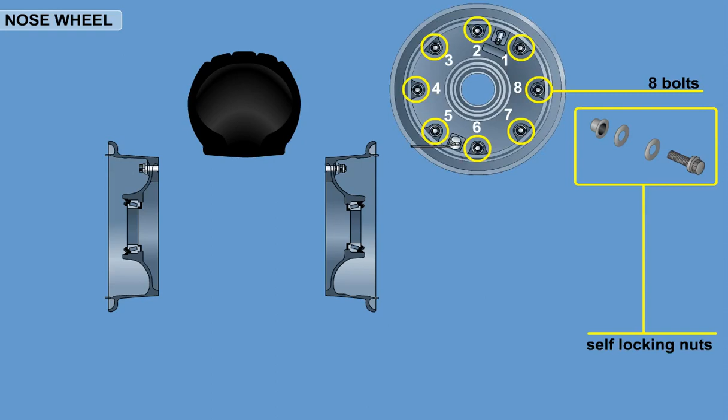The nose wheel is also a split web assembly made of 2 wheel halves machined from forged aluminum. The 2 wheel halves are connected by 8 bolts with self-locking nuts and washers. 2 fully sealed tapered bearings are installed into the wheel.

A filling valve, or optionally a filling valve with an incorporated pressure gauge, is installed in the outer wheel half. If the pressure in the tire increases to between 365 and 435 psi, the pressure relief plug in the outer wheel half will release the pressure.

The multi-disc carbon brake assembly slides over the main landing gear axle and onto a brake torque pin. The brake has the following main components: 1 pressure end plate, 2 stationary discs, 3 rotating discs, a torque tube, a piston housing with 7 pistons, 2 wear pins, and a shuttle valve with quick disconnects.

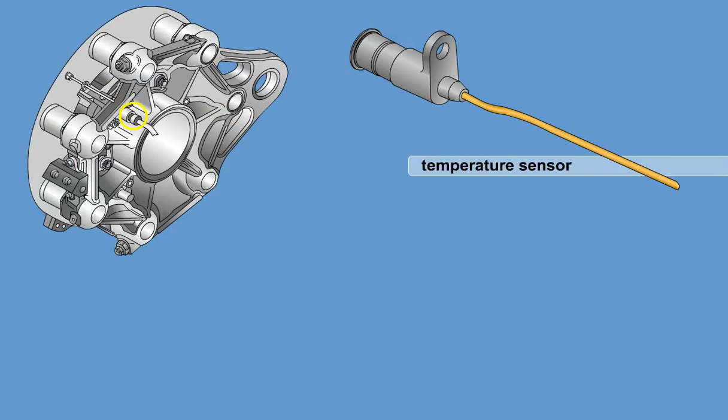A brake temperature sensor is installed into the brake assembly at the top of the piston housing. The rotating discs are keyed to the wheel. The stationary discs are keyed to the brake torque tube.

The brake assembly is interchangeable for left and right hand installation by rotating the shuttle valve and repositioning the brake temperature sensor. The carbon heatsink allows refurbishment by alternating different sets of carbon discs. Note, the refurbishment cannot be done on the wing.

Each brake has 7 self-retracting and self-adjusting pistons. The self-adjusting mechanism compensates for brake disc wear and keeps the piston travel constant as the brake wears.

The piston housing is attached to the torque tube. The cylinder sleeve is installed inside the housing. The spring-loaded piston moves inside the cylinder sleeve, forcing the insulator against the pressure plate during brake application.

An internal spring and swage tube return mechanism provides precise adjustment of the brake. The mechanism adjusts to maintain constant clearance by deformation of the steel swage tube. A hardened steel swage tube is anchored in place at the end of the steel return pin.

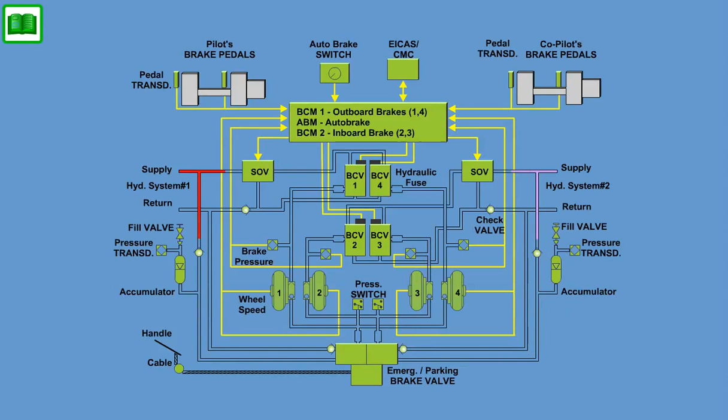When brake pressure is applied, the shuttle valve will automatically allow flow from the higher pressure source into the brake assembly. The hydraulic pressure moves the 7 pistons against the pressure plate. The pressure plate compresses the carbon discs against the end plate. This compression causes friction between the rotating and stationary discs.

When the hydraulic pressure is released, springs move the pistons back into position. Braking torque is transferred from the torque tube to the aircraft through the brake torque pin. The actual temperature at the center of the heatsink is sensed by the brake temperature sensor on top of the brake assembly.

Brake wear is indicated by 2 wear indicators attached to the pressure plate. As brake wear increases, the pressure plate moves and pulls the wear pin to the wear indication bracket to indicate the worn brake.

The Embraer steering control system is an electronically controlled and hydraulically actuated steer-by-wire system, operating either in the normal mode or in the free caster mode, also referred to as bypass mode.

The system consists of the following main components: the steering handwheel, located on the left side in the cockpit, used for low-speed steering control; the pilot's and co-pilot's rudder pedals, used for high-speed steering control; and the disarming switches, located on the cockpit control yokes and on the left forward fuselage, used for active control of the steering mode by both pilots and ground personnel.

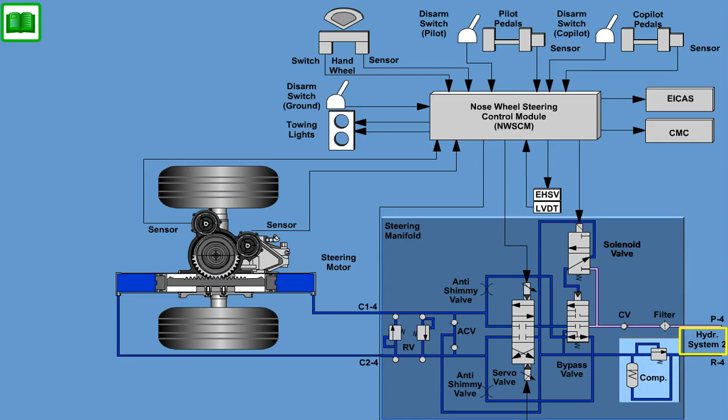The steering handwheel is attached to the left side of the cockpit. It incorporates a switch and a rotary variable differential transformer. Pushing the handwheel down and turning it causes the aircraft to turn left or right. The RVDTs transmit the position of the handwheel to the NWSCM.

The maximum steering angle possible using the handwheel is 76 degrees, and is limited further by the NWSCM as aircraft wheel speed increases. At taxi speeds from 40 to 100 knots, the steering angle will be reduced down to 7 degrees.

Steering angle response to handwheel position is non-linear. Turning the handwheel from 0 to 40 degrees results in a steering angle of 10 degrees, and from 40 to 80 degrees results in a steering angle of up to 76 degrees.

The steering input of the rudder pedals is sensed by 2 RVDTs installed in the cockpit control linkage. Rudder pedal position is transmitted from the 2 RVDTs to the NWSCM.

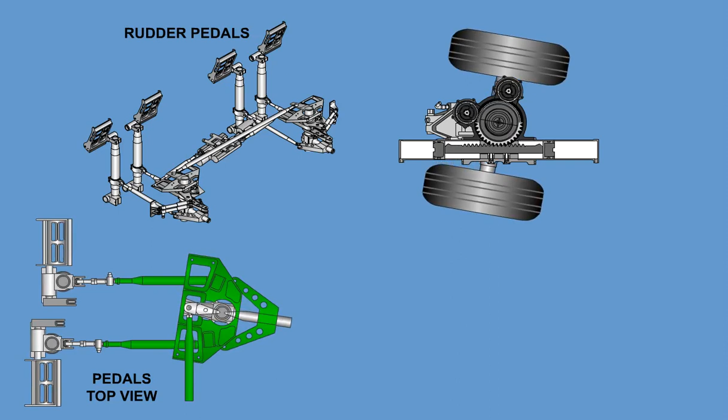Pushing the left or right steering pedal turns the aircraft left or right respectively. Steering deflection using the pedals is limited to 7 degrees left or right with weight on wheels.

Whenever the steering handwheel is pushed down, the steering pedal mode is automatically disengaged. Transition from one mode to the other will be smooth. The steering pedal mode is automatically active after powering up, and if no failure in the steering system is detected.

The steering motor is attached to the nose landing gear main fitting. It consists of two hydraulic cylinders with pistons attached to a geared rack, driving the circular gear on the main fitting.

Hydraulic pressure from the steering manifold makes the steering motor move, and torque links transfer the torque from the steering motor to the lower part of the sliding tube and axle assembly.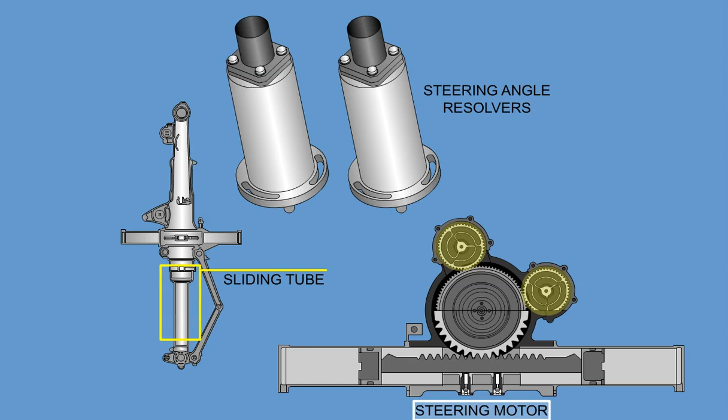Two steering angle resolvers are installed on the nose landing gear, sensing the position of the sliding tube to provide a closed-loop steering control. One will feed back the position to the NWSCM control channel, the other one to the NWSCM monitor channel. The steering motor operates over a range of 76 degrees left and 76 degrees right.

The steering motor will not operate beyond this range. However, the nose landing gear can be steered passively during towing over a range of 170 degrees left and right.

The steering manifold is installed in the nose landing gear bay and incorporates the hydraulic system control components. The main components of the manifold are the servo valve, the solenoid valve, the bypass valve, the compensator, the anti-shimmy valves, relief valve, and anti-cavitation valve.

A 50-micron filter is installed at the inlet of the manifold. A check valve will retain the fluid inside the steering manifold in case of loss of supply pressure.

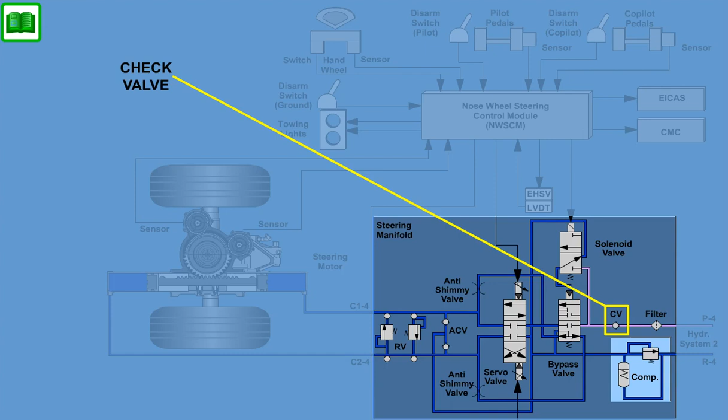The solenoid valve is a normally closed, two-position, three-way valve. When energized, it moves to allow hydraulic pressure to reposition the bypass valve, allowing hydraulic pressure from the inlet to the servo valve.

Depending on signals from the NWSCM, the servo valve directs pressure through outlet C1 or C2 on either side of the steering motor to move the nose wheels. At the same time, the opposite side is connected to return.

The position of the servo valve is continuously monitored from the NWSCM by a linear variable displacement transducer, LVDT. Whenever the solenoid valve is de-energized, the bypass valve connects both nose wheel steering cylinder chambers hydraulically. This allows free castering of the nose wheels.

The compensator provides a minimum pressure and fluid supply within the steering system in case of loss of supply pressure or free caster mode, necessary for the damping function of the restrictors and to compensate thermal effects.

The anti-cavitation valves ensure that fluid return pressure is always available in the steering actuator chambers. This prevents cavitation during steering rates or oscillations.

The anti-shimmy valves, or restrictors, provide a damping effect by preventing rapid fluid movements after, for example, a lateral shock or in the free caster mode. These valves, together with the anti-cavitation valve and the compensator, ensure effective shimmy damping in the free caster mode.

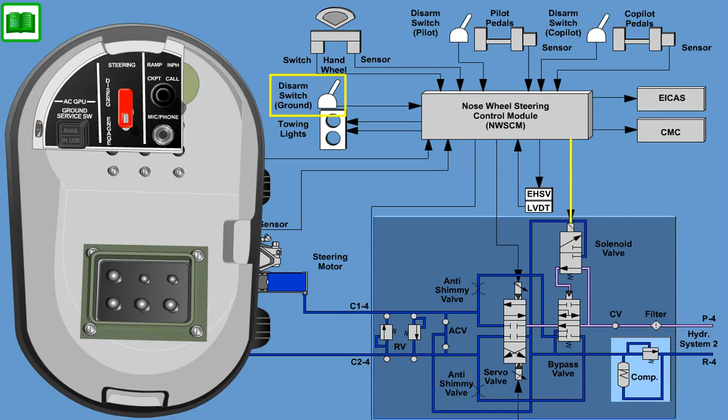The steering system can be disengaged manually using the pilot or co-pilot disarming switch on the control yokes, or the fuselage disarming switch on the left-hand forward fuselage for ground handling.

As long as the disarming switch on the control yoke is actuated, the nose wheel steering control module will switch to free caster mode.

When the switch is released, the nose wheel steering control module will go to the hand wheel steering mode after re-engagement by pressing the steering hand wheel.

The disarming switch on the forward fuselage is installed above the electrical ground connector. It is a guarded toggle switch to either operate in nose-wheel steering control module controlled steering in the engage position, or in the free caster mode in the disengage position.

Whenever the steering is disengaged, a steer off status message is displayed on the EICAS.

On the left-hand side of the nose landing gear, a towing light box is installed. The towing light box green indication will illuminate when towing is allowed, and a red indication illuminates if towing is not allowed. The towing light function is operative when DC bus 2 or hot bus is applied, selected by a toggle switch on the towing light box.

The NWSCM will bring up the red light to indicate that towing is prohibited if either the brakes are activated, the park brake is activated, or the steering system is active.

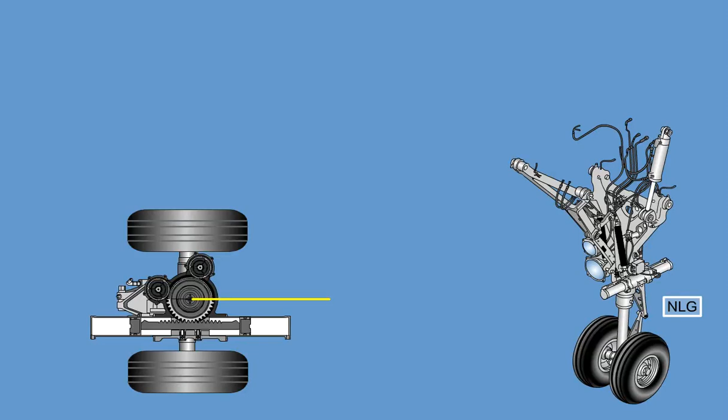The maximum allowable steering angle of plus or minus 170 degrees is monitored by an over-travel proximity sensor on the nose landing gear shock strut. In case the maximum towing range has been exceeded, a steering over-travel target will be sheared off. Via the over-travel proximity sensor, the PSEM-1 will detect the lack of this target. As a result, on the EICAS, the caution message LG no dispatch will be indicated.

The steering is controlled through the nose wheel steering control module, called NWSCM. The NWSCM is installed into two slots of MAU2 and electrically powered by the DC bus 2, or by selection in the towing light box from the hot bus. The control module incorporates a control channel which commands the steering system and a monitor channel that communicates with the EICAS and the CMC for system status and failure indication.

Whenever the air-ground system and/or the nose gear shock absorber proximity sensor indicate an aircraft in-flight condition, the solenoid valve is switched off. This prevents steering commands during gear retraction and flight.

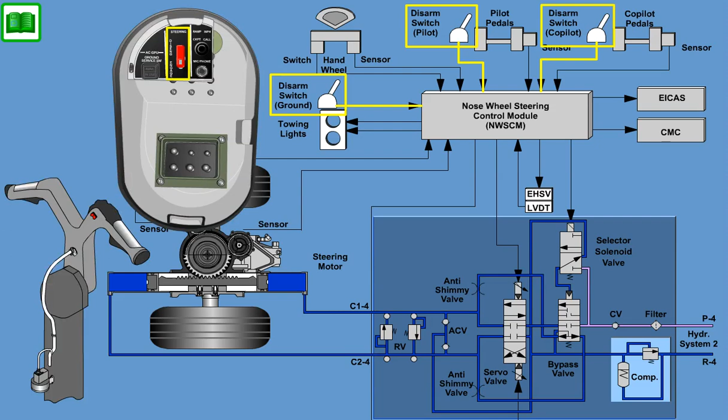The NWSCM controls the servo valve and selector valve in the steering manifold and the lights in the towing light box. It receives feedback information from the handwheel unit RVDT, the two-pedal sensor RVDTs, and the three disarming switches, located on the pilot's and co-pilot's yoke and the forward fuselage. A servo valve LVDT sends servo valve position information in the manifold, and two position resolvers signal the actual steering position.

In addition, parking brake pressure, brake activation, and aircraft on-ground signals are monitored by the NWSCM.

Whenever the steering system is powered up, the pedal's steering mode is active. When the right-hand pedal is moved forward, the NWSCM senses this movement via the pedal sensor RVDTs and energizes the solenoid valve in the steering manifold. Hydraulic pressure from hydraulic system 2 can now move the bypass valve, and hydraulic pressure becomes available at the servo valve. The NWSCM then moves the servo valve to direct hydraulic pressure via the connection C1 to the piston of the steering actuator. The opposite side of the actuator is connected at the same time via the servo valve to return. The turning movement will be transferred through the torque links to the nose wheels. The NWSCM will receive the actual deflection information from the nose wheels and will limit it to 7 degrees.

If the left-hand pedal is now pushed forward, the NWSCM moves the servo valve to the opposite side, connecting hydraulic pressure via C2 to the other side of the steering actuator and draining off the opposite side. The wheel will deflect to maximum 7 degrees to the left side.

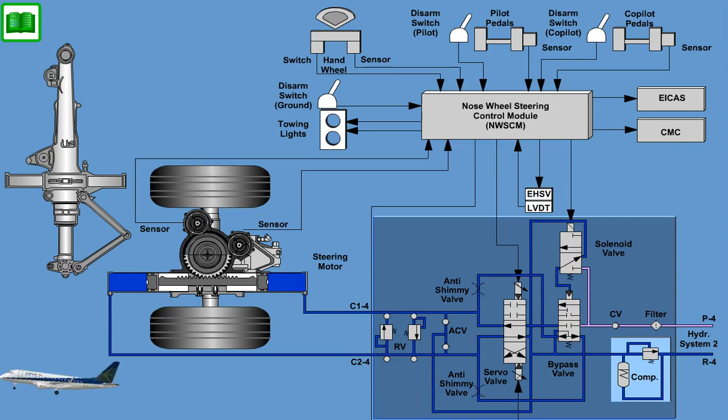If the handwheel is released, the system will automatically go to the pedal steering mode. In case the nose wheels are still deflected, they will be smoothly moved to the pedal position related angle of deflection. If the aircraft takes off, the NWSCM will be switched off, and the nose wheel will be centered by the internal centering mechanism when the shock strut extends.

When the steering system is deactivated, it enters the free caster mode. This could happen either by manually deactivating the system by one of the 3 steering disconnect switches, or automatically in case of a steering system failure. Through the bypass valve in the steering manifold, the hydraulic chambers of the steering actuator are connected, and the nose wheels may deflect due to external forces.

The anti-shimmy valves, anti-cavitation valve, and relief valves guarantee shimmy damping in the free caster mode. The nose landing gear has an inclination of 8 degrees forward to center the nose wheels automatically in the direction of ground run. Towing with angles of up to plus or minus 170 degrees is possible in the free caster mode.

Whenever a safety-critical failure, such as a servo valve failure or a power supply failure, is detected by the nose wheel steering control module, the nose wheel steering is switched to the free caster mode. On the EICAS, a steer fail caution is displayed when the landing gear is down. After this system disengagement, the nose wheel follows freely in the direction of ground run, and steering can be carried out by use of differential braking and/or by rudder commands.

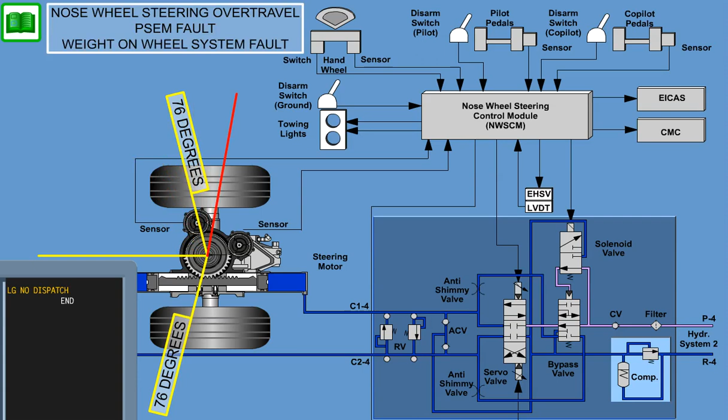An LG no dispatch caution appears in case of a nose wheel steering over travel, proximity sensor electronics module (PSEM), or weight on wheel system fault. For further fault investigation, the CMC has to be used, which will indicate the detected failure in detail.

The landing gear position and warning system is used to provide landing gear status and failure information. The position and warning system has the following subsystems: the landing gear indicating system, the air-ground or weight-on-wheel system, and the landing gear warning system. The landing gear indicating system is controlled by 2 identical proximity sensor electronics modules. These PSEMs each make an analysis of the proximity sensors for the landing gear system.

Ground spoiler system and aircraft doors. The air-ground system makes use of proximity sensors on the main landing gear and nose landing gear to determine whether the aircraft is on ground or in flight. The landing gear warning system forwards information concerning failures or abnormal landing gear configuration during landing to the EICAS.

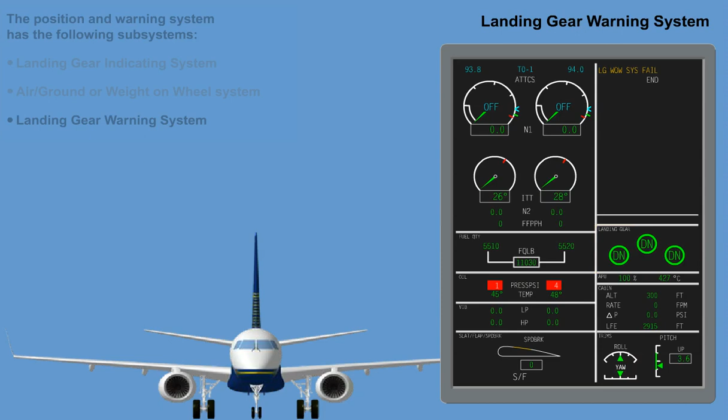The landing gear indicating system processes the information coming from the gear lock proximity sensors and control lever signals to provide landing gear position indication on the right side of the EICAS display. Two proximity sensors which sense each locked condition, down-locked or up-locked, are installed at each landing gear leg. They are segregated in systems 1 and 2.

The locking status from the proximity sensors and control lever positions are processed by PSEMs and sent digitally via ASCB to the EICAS. The landing gear indication system has the following components: 2 proximity sensor electronics modules,

Nose gear downlock sensors, nose gear uplock sensors, main gear downlock sensors, main gear uplock sensors, nose gear door sensors, and towing lights.

Each PSEM is a dual-slot, single-channel MAU utility module. Each module is provided with 2 front panel and 2 backplane connectors. PSEM1 is installed in MAU1, powered from DC Essential Bus 1, and PSEM2 can be found in MAU3, powered from DC Essential Bus 2.

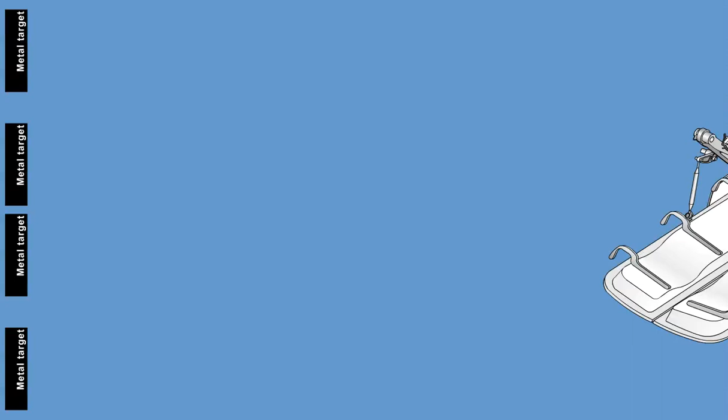When the doors are closing, metal targets will end up in front of the proximity sensors. The proximity sensors send the signal to the PSEMs, 2 for each PSEM. If at least one of the 4 nose gear doors is not closed after nose gear uplock, or one of the forward nose gear doors is not closed after nose gear downlock, the landing gear nose door open caution message will show up on the EICAS. The message will also be activated in case of a failed nose gear door sensor or loss of valid ASCB communication from one or both PSEMs.

The main landing gears are equipped with uplock and downlock proximity sensors. The 2 uplock proximity sensors per leg are installed in the uplock box to sense the gear when it is up and locked. The 2 downlock proximity sensors are attached to the lower locking stay. When the gear is down and locked, the metal targets of the upper locking stay can be sensed by the proximity sensors.

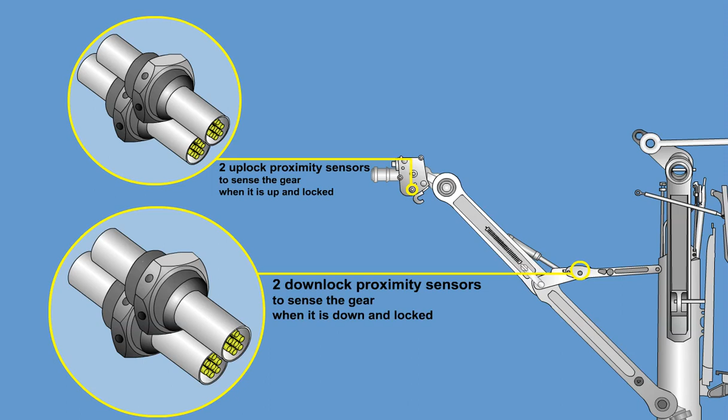The locking status from the proximity sensors and control lever position signal are processed by the PSEMs and sent via digital ASCB format to the EICAS. EICAS indication of the landing gear position consists of 3 colored symbols. From left to right, each box represents the position of the left, nose, and right landing gear.

For the landing gear locked down, green circles enclosing a green word down are indicated. If the control lever is moved and the gears are in transition, amber crosshatches are shown. If the landing gear is locked in the up position, white squares enclosing a white word up are shown.

A disagreement between the control lever position and any landing gear leg position for more than 20 seconds will activate the message, landing gear lever disagree, and the position in disagreement will change its color to red. In case of ASCB communication loss or invalid ASCB data from both PSEMs, the parameters will be defaulted to false condition, changing the indication to red and indicating the landing gear lever disagree message after 20 seconds.

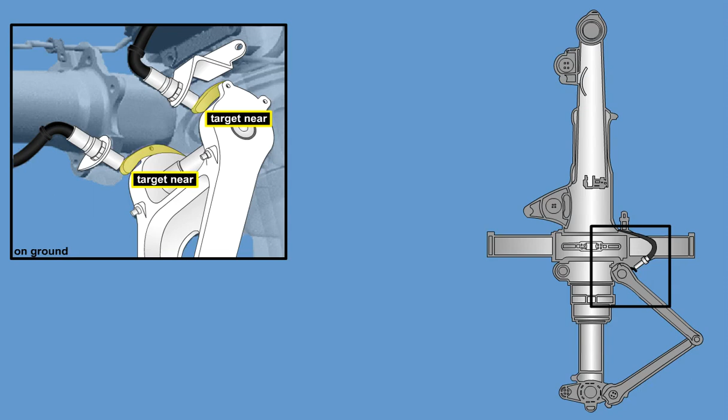The weight on wheels indication system indicates whether the aircraft is in flight or on ground. It also makes use of the proximity sensor electronics modules and 6 proximity sensors. 2 proximity sensors are attached to each landing gear shock strut to determine when the struts are compressed if the aircraft is on ground. The nose landing gear proximity sensors face the torque link. When the shock strut is compressed, the torque link folds, and metal targets are sensed by the proximity sensors. After liftoff, the shock strut will extend, unfolding the torque link and moving away the metal targets. This will end in the weight off wheel calculation.

On the main landing gears, the proximity sensors are also installed on the shock strut facing the torque link and function exactly the same way as on the nose landing gear. The inputs of these sensors are calculated and combined by PSEM1 and PSEM2 and forwarded to the aircraft systems requiring weight on wheel status.

The landing gear warning system will provide a landing gear voice message, landing gear, if at least one gear is not locked down and there is an intention to land the aircraft. The landing gear aural warning logic is processed in the Monitor Warning 1 and Monitor Warning 2 simultaneously, which are located on the NIC1, MAU1, and NIC2, MAU2 respectively. The landing gear aural warning logic uses the thrust lever angle, flap setting, and radio altimeter to define the intention to land the aircraft.

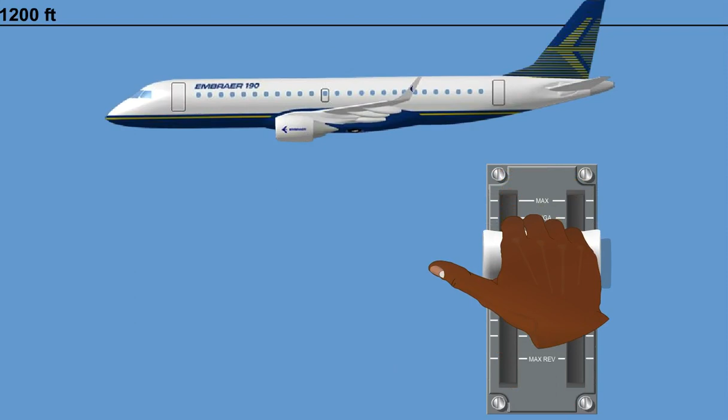When the aircraft is flying below 1,200 feet above ground level and 1 or 2 thrust levers are reduced with 1 or more landing gears not locked down, the aural warning landing gear will come up. For dual engine operation, the message will come up if thrust lever angle is reduced below 45 degrees, and in single engine operation below 59 degrees thrust lever angle.

If the flaps are set to one of the two landing positions with at least one landing gear not locked down, the landing gear warning will be triggered independently of altitude or thrust lever angle position. In case of invalid radio altimeter signal, the warning will be released.

This warning actuation due to an invalid radio altimeter signal is cancelable by pressing the landing gear warning inhibition switch on the main instrument panel. If pressed, a bar will illuminate in the switch to indicate that a cancel action was performed. The indication bar extinguishes if the thrust levers are advanced above 45 degrees with dual engine or 59 degrees with single engine operation.

The bar will also extinguish in case the flap selector lever is set to landing configuration or if all landing gears are down and locked.